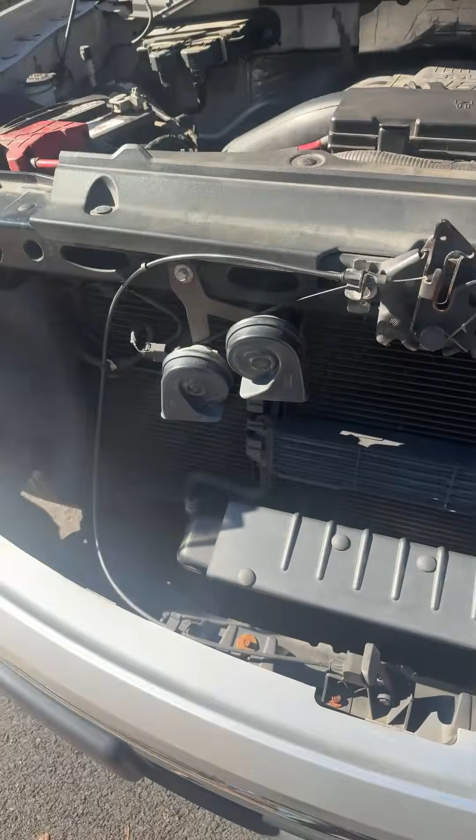So as soon as you put the key in, do you even got to start it for it to do it or no? You got to start it for it to kick on or no? Yeah, just stick it with the key in. Don't start it. So when you don't start it, it don't do nothing. All right, go ahead and start it up for a second. As soon as it starts it.

There you go. Dang. Now we in overdrive. Like that? It just started doing that out of nowhere. And you said after the car wash it happened? It just happened randomly. You can shut it off. And then so it shuts off, it kind of kicks down, does all that.

What's going on with this? We got to figure it out. We'll start with the diagnostics stuff. Get my computer on there. You got no engine light, right? All right, let's try it with the El Cheapo. Oh no. Yeah, I got you. That's crazy. Shouldn't be doing that. You got something going on here. I was thinking cylinder head temperature sensor, and maybe let me see. I'll get a flashlight.

The CHTS, I'll show you here on the Fords where it's at. Give me a second. Grab a flashlight. Let me show you. Show me what they fixed. Yeah, so you got a couple of them. That's probably not the right one. Over here, you said they did the sensor already.

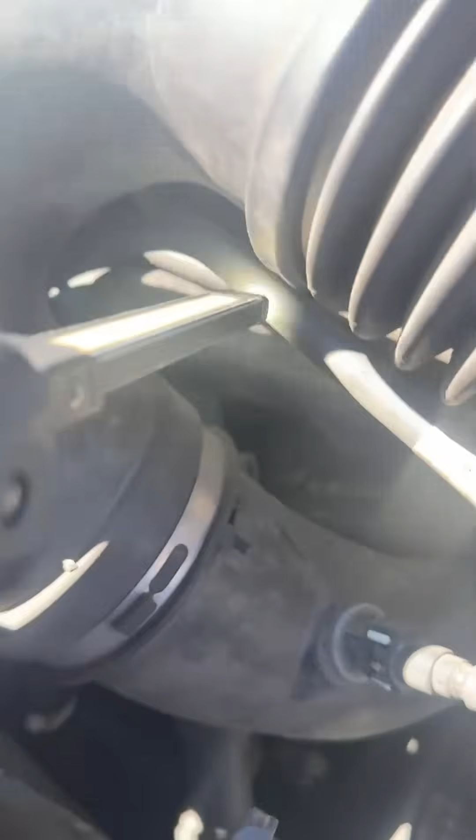All right, right down there, I think you got another temperature sensor. Yeah, I know there's a ground wire right there. I think it's CHTS, I believe. Let me just pop my cap off real quick. I can take a look, but I'm going to get my computer on. Ooh, that don't look good, bro. Let me see that real quick. Ooh, that don't look real good. I change it every 5,000 miles. I ain't saying that's the problem why it don't look good. That looks like it could be what I'm thinking it might be. Hopefully you ain't blowing no head gasket.

These 3.5s, how many miles on it? 190. Pull that dipstick out back there. Can you go and grab it for me? Don't rip it out of there. All right, let's see what that look like. Just hold it right down. Get it on a better setting. How high does it look? I think that looks okay. I can't really tell. Let me get some paper towel. We'll wipe and put it back in, give it that quick check, see if it's milky is all. There you go, wipe it real quick and put it back in.

It never overheated that you know of, right? No, I've been looking at it constantly. So just because the gauge ain't overheating don't mean you're not overheating though, you know? If the gauge ain't working, so why'd you get the other temperature sensor done? I don't know. It's just what the guy said. So maybe it wasn't working at some point in time. So anyway, see how it look now. Does it look level? Does it look high? It look really high, don't it? So when that usually happens, it means you may have coolant going to your oil. But then again, you didn't wipe it good.

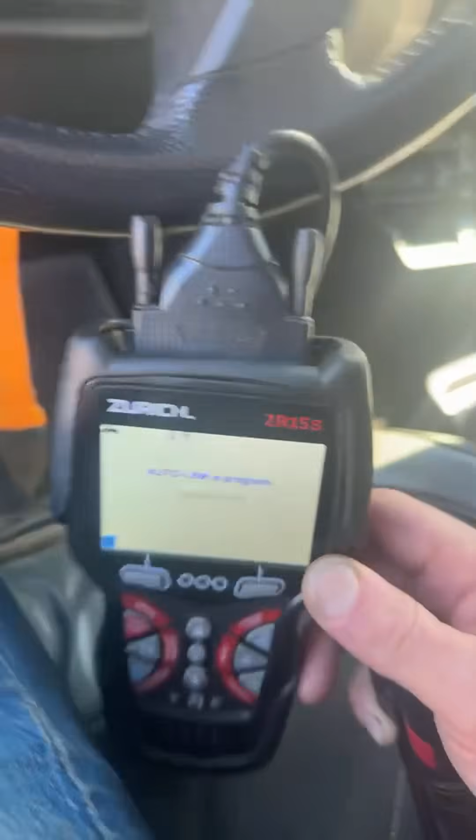All right. You got your key, man? Is it in here? Is it a push or not? Where's, oh, here it is. I don't even see your little key thing. Let's start it up. Just top back on the... there it is. Yeah. Make sure everything's back on tight. Just leave that cover off for now, so do I get everything plugged up? I'm gonna first do just an initial scan. We'll go from there. I'm not gonna start it. I just need to have it on. Let's see if you got any codes. We'll use the Zurich ZR15S first to see what we got. We'll go get the big boy out if we need to.

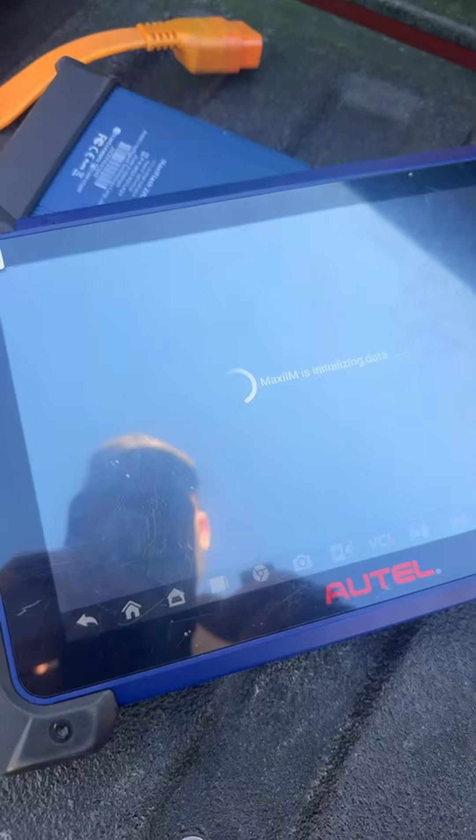Everything green on here. So, all right, the cheap one says you're good. Now we'll have to get the big money machine. Yeah, you got nothing on here, man. Shows you're perfect, which is crazy. So now we'll go bust out the big guns. They give me a password. Let me get out of here. Sorry, can't have y'all see my password like that. Give me a second. Get the Autel out. All right, we're ready to rock with the Autel now.

All right, let's see what we got. This will tell me something, I hope. If this won't tell me nothing, then we got a mess on our hands. Nah, this will 100% tell me something. Unless it's supposed to do that, which I don't think it is. The other one ain't real great of a scan tool. It just does the basics. There you go. I'm looking now for the plug and it's right in my face. I've worked on the cars too much, I'm starting to get burned out. All right, let me see here. First off, let's get out the Autel IM608 Pro. We're going to diagnose this properly. All right, we're gonna go to Diagnostics.

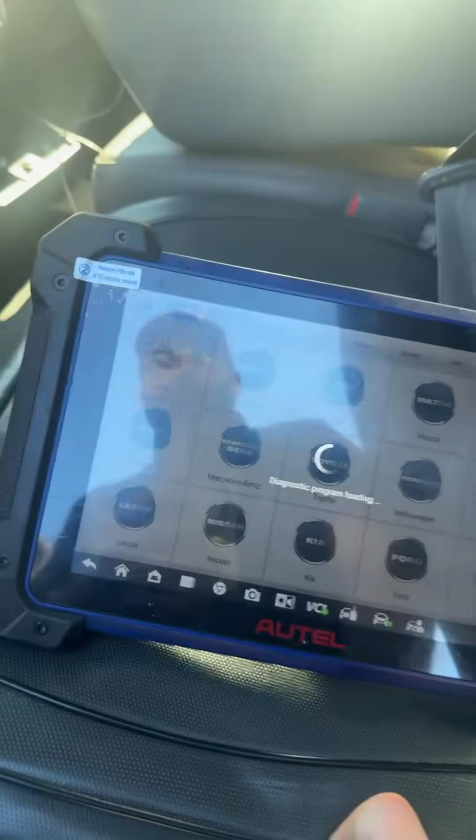Let's see. You still doing floors? They're doing mine sooner or later. My dad's so crazy, man. He's gonna get it done. He don't care. He's like, you don't want to do nothing until we sell it. He's like, I'm not selling my floors. Doing these floors, just mess them up. I don't know, he's just getting crazy, man. His thing was going great. You know how that goes.

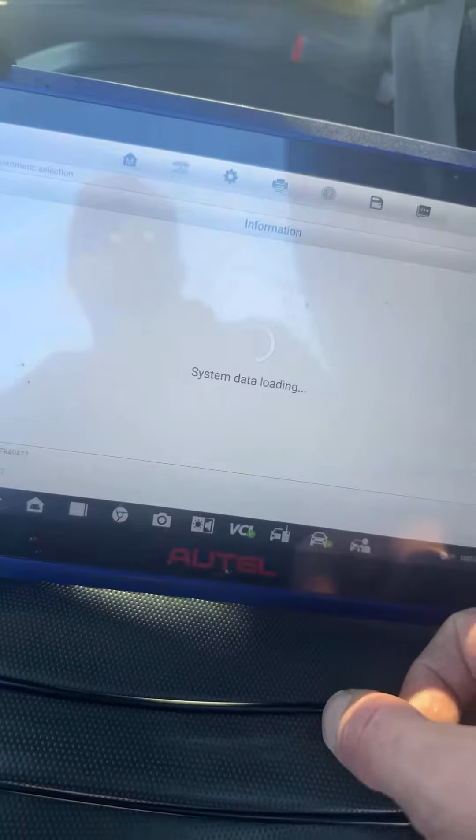All right, there we go. We got the information. Boom. I'm going to scan all your systems and we'll see what's going on.

I ain't seen you in, what, a year or something? In a while. Maybe more. I remember the last time I seen you, I looked at your car. We were dealing with something with the serpentine belt or pulley you were having a problem with. Something crazy going on. Been a minute. So you staying in the same house out there? Oh, okay. You gotta do it. I know how it is, man.

It's tough. All right, you got 2 so far on this computer. What the heck? You have a code for recirculation damper motor. I don't think that's related to this, do you think? Now, this is what I'm concerned about. Lost communication with front control display interface module. You just had that done, though, right? Your module, you said. You just replaced the front interface?

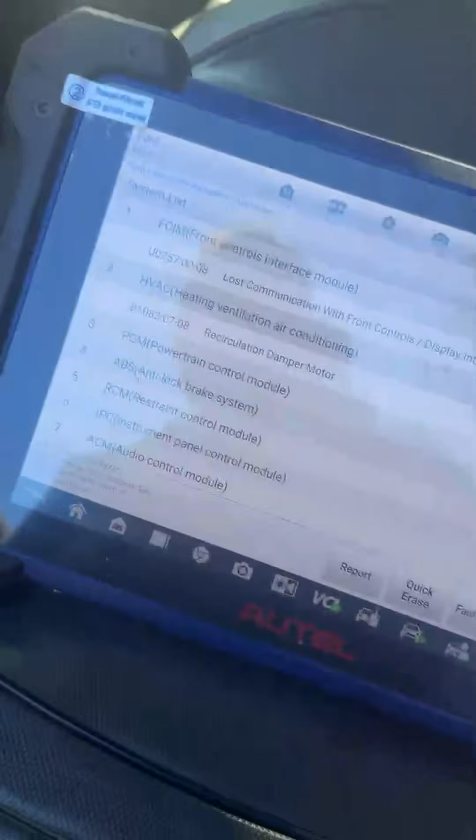Yeah, this guy right here, inside the car. Come here, I'll show you the codes I'm getting, bro. Come over here and check it out. So, lost communication with front. I never did take the battery off that when I replaced it. Yeah, so that's probably an old code, right? It could be. Yeah, because this thing is sensitive. I just unplugged it and then put that thing back in. You open this there? So could the recirculation damper do that? I don't know. That's a weird code. I'm gonna go plug it into my computer and we're gonna see.

This right here. Like I replaced this. Yeah, that's your front control. And you probably unplugged it when you did it, right? Unplugged it. Yeah, I took it out. Yeah, that's what it is. Put it back in, but I didn't unplug the battery or anything. I didn't know if it needed to be reset. I don't know. I just hooked it. I believe you. I believe took this out and hooked it back.

You got your phone on you? Take a picture of this real quick, because I'm about to erase these codes. It should be on. It's right there in front of you. Just pull it off the plug. You got it. You got your camera on here? I just need to get a picture. Yeah. Go ahead and take a picture of that for me right quick. I can't do it with my phone right now while I'm doing this. Take a picture of it.

Mainly, I need this code. Recirculation damper. I'm gonna enter the system though in a second. I'm gonna wipe him here in a minute, and I don't want to lose it. So that's your main DTC right there. That's what you need, that picture. Yeah, hang on to that guy. Yep. I don't know if it has nothing to do with it, but we gonna find out, right?

So let's see here. Would it pull any codes if you turn the car on? So let's say not current, not currently present. So I'm gonna start it and see now if I get a new code. I wonder if I can wipe it with my computer one time if that'll go away. Sometimes it will. So it kicks right on this, and that's so crazy. That's high speed too. So okay, let's scan it again real quick with the truck running. It should pick up on something. Same thing. We're not picking up on anything.

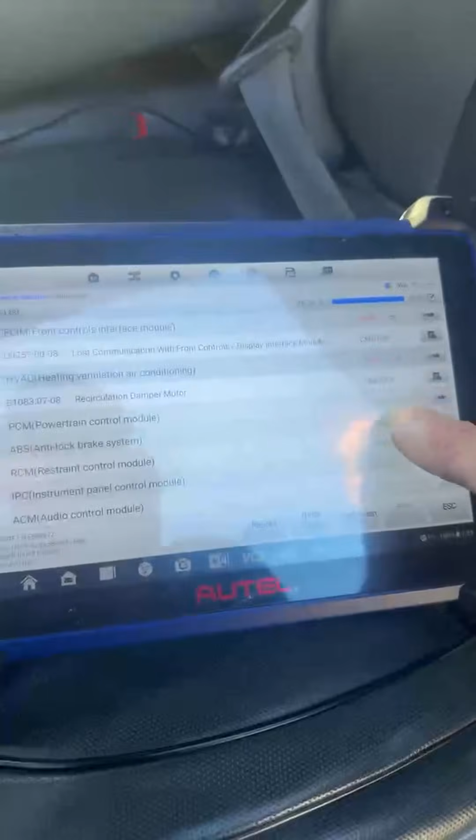Looking good. So let's enter the system and see what's going on with this guy. Does your AC not work right? Does it not recirculate? Yeah, it doesn't feel cold right now either. Yeah, that's what it is. Something going on. That's probably not unrelated. The AC works, but since it's been doing that, now it's not blowing the AC. From what I'm reading right here, man, I think it's like a relay, right? Check your relay box. The relay is getting stuck open or something. I bet you everything.

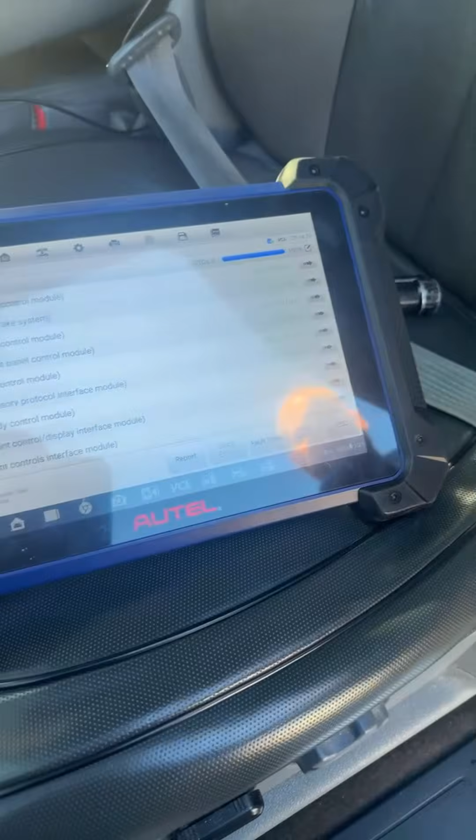And that's what would do something like this, because it's not going to really be a standout issue because it's not showing up on my computer. One of them, but I don't know if there's several of them or what. You have multiple relays on here, yeah, but there's no reason that should stay stuck on, right? No. So now that I've cleaned your computer of all your old codes, they're not coming back. So that's telling me it's probably a relay. So the best way to check the relays, let me show you real quick. I can do it on my computer, actually.

Let's enter powertrain control module system. Let's see if I can check your fans on my actual computer. I should be able to run a code test on here. Let me just check it out real quick. All your codes are clear. We're going to go here and do active test. Should be able to check your fan speeds, your different speeds, and we'll see what's happening in there.

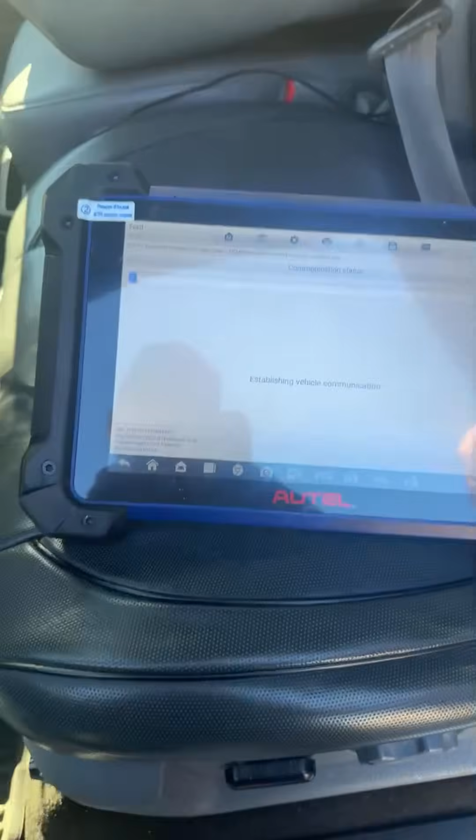Great part about having these new computers, man. They really help. I got to re-update this in 3 days. The crazy part is, I waited just on time. I'm gonna get like $300 off the update because I get the November Black Friday special.

I'm so glad I bought this around then. I didn't even think about the updates. They always give you like 20% off. Black Friday is great. I'm probably update 2 years on it. It's regular like $1,200. It's crazy. Whatever, it's not cheap.

All right, let's see here. Fan control, high speed. Let's just do fan control, low speed real quick. Let's check it. Okay, I don't need any live data right now. So I'm gonna monitor the fan speed. Watch this. We'll do on. Oh, what the heck? It's not supported. It must mean there definitely is a problem with it then.

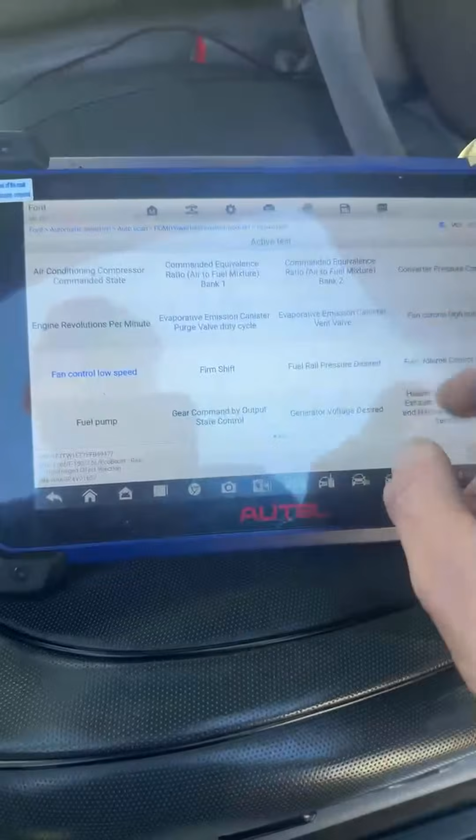Let me see. Let's try the high speed. All right, I just hit OK this time. Select all. See if I can do it. Probably gonna let me do it. Yeah, that's great. Let's read it real quick. You know what? Maybe because the fan ain't running, car ain't running. Let's see now if it works. Oh, wow, see that? Check it out. There we go.

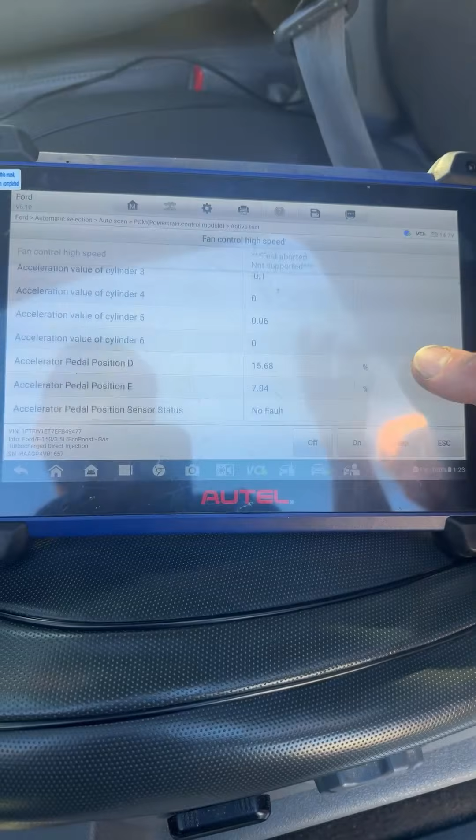Well, let me take it in. See, it's not letting me send it off. I was saying, even when I turn the controls off, it doesn't turn off. The controls are off now, but it just stays. Now, I guess it could have something to do with your AC too, because let me show you something. So your AC fans could be. Nah, it's too high, I believe.

We turn on these controls, nothing happens, nothing changes, right? Turn the AC on for 1 second, okay? Tell me if you get cold. Is that okay? Not freezing you yet? You put on the max AC if you need to. That's where you get the cold. Yeah, it's nothing to do with that, I don't think. So it should be freezing cold. It don't make no sense.

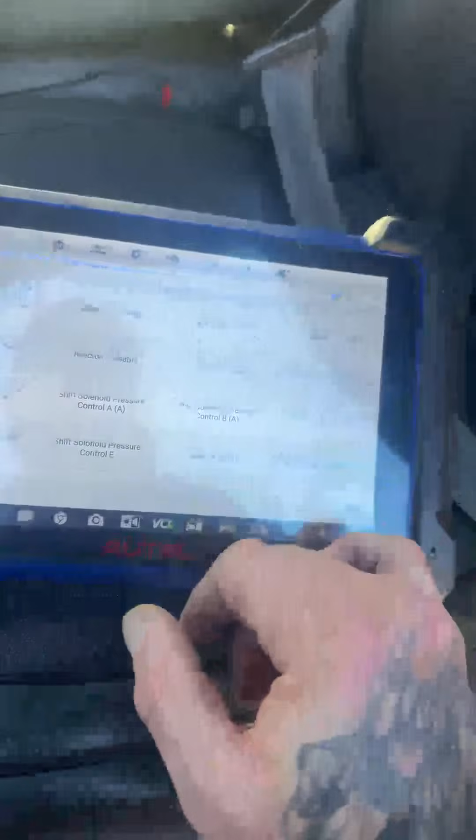Problem is probably with the relays. So I'm going to go up here and take a look at your relays first. It won't let me do the test anymore. I don't know if it's because they're stuck on, or it's knowing what's the problem. It should pick this up if it's a problem, but if it's a relay stuck, it's not going to pull up a code. So if I put my money on it, it's a relay.

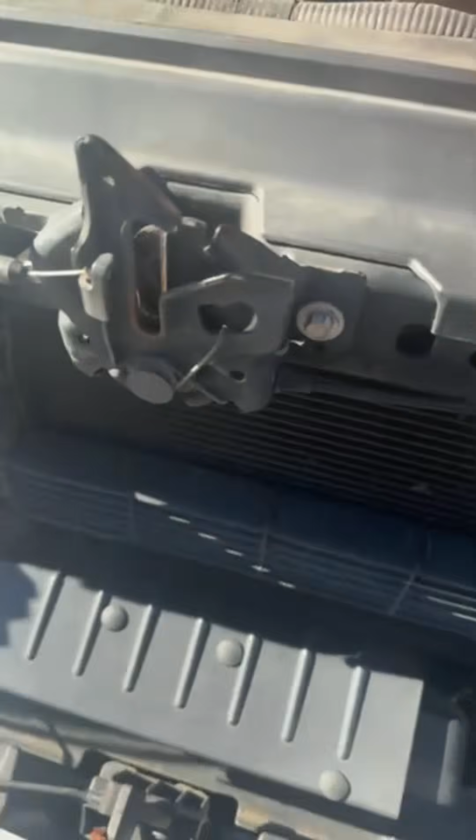So I'm going to come out here real quick. Where's your relay box on this guy? Up front? Right here. Yeah, these have a lot of problems with them. I don't like how that does it. You got one over there in the floorboard too. I turned it off, I think. Right now what I'm doing is smacking on these, not hitting hard enough to mess them up. Giving a little smack, see if anything's not doing right.

This one. You sure they put the right one in there? Ow, a piece of my fingernail came off. That hurt.

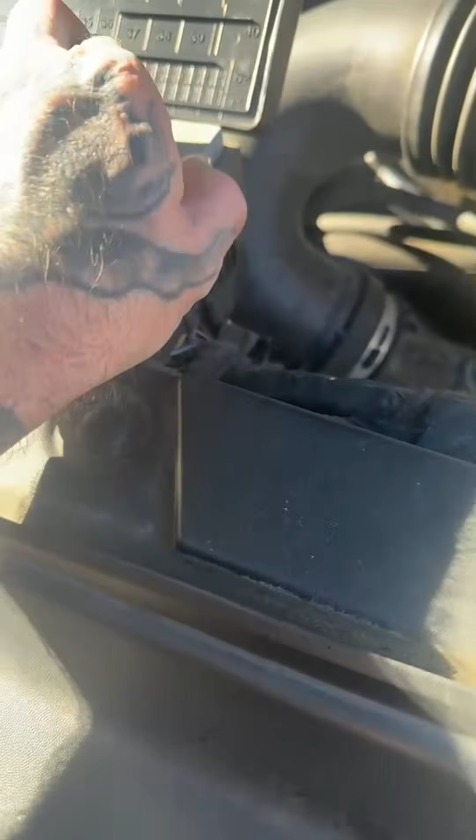They feel hot too. Yeah, there's a fan relay. Probably the wrong relay. That's burning up hot, man. It's unbelievably hot. Pull that one off real quick for me. Let me see that one first. I don't know if this is the old one or the new one. This is the old one, Ford Motor Company on it, right? Right, the new one. Put the new one back in.

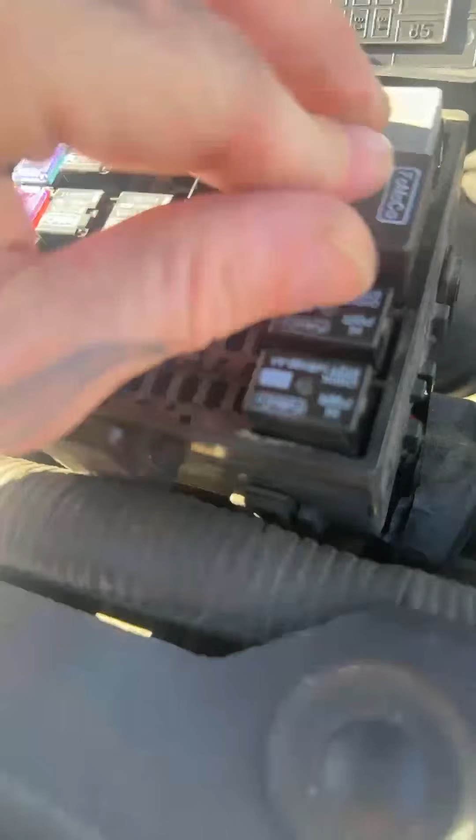Nothing wrong with a relay. I don't know why they fixed it for. Ain't nothing wrong with a relay. Relay's fine. You just seen the relay work fine, right? Yeah. So why did it turn off when it was out? Huh? Why did it turn off when it was out? Look at that. So the relay has clearly got a problem, maybe. Or the problem's under the box. We've got a lot of problem on the box. But what's happened is it could be getting stuck.

So now your fan ain't gonna be on at all. Yeah. But see, these relays, if you look at the top of this guy here, shows you how they run. Feel how hot that is too? Yeah. So it shows you how they run. So if it's stuck in an open position. Show you a way. Hold this real quick. Hold this, I'll show you something. Stick the bottom of my flashlight. Watch this. Okay, here. Turn the car real quick. You're not with the car going. That car's so hot.

Show you a quick, easy relay test. Watch this real quick. So you just take the magnet. Watch this. Hear it? Hear it clicking? Yeah. Now, is it getting hung? Maybe. Yeah, but it's definitely working. Yeah, man, I figured it. Look at this. Another way to check it with a probe. I can hear it clicking. I know the relay is good. That's not a bad relay. Same way with this one is probably fine.

But what's going on, maybe underneath where the relay is supposed to go ain't working, or something's definitely getting hung. I don't know. But regardless, it may be in the underhood fuse box as well. Let's see here. Feels kind of loose too. Like maybe it ain't making a real good connection. I don't know, but it's one of these issues here going on. So, well, I need to probably get my probe out. It's probably gonna be some kind of electrical. It's just got a lot of corrosion on it.

No, it looks good. So they put that in there thinking that was the issue. I don't know why they stuck in a relay. Yeah, they didn't know what they were doing. These guys don't know shit. Throwing stuff on there. Yeah, so if you look on the bottom, sometimes these guys are different. Hopefully they're the same. The dealership. Yeah, let's see here what we got.

A lot of times it'll be the cylinder head temperature sensor that goes bad. But my computer would pick that up, right? We definitely have a code for that. So what I'm thinking we got to do, I'm going to put the code and put this in my computer as an issue and look it up in, not ALLDATA, but Direct-Hit. Let me see real quick, and maybe check your relays.

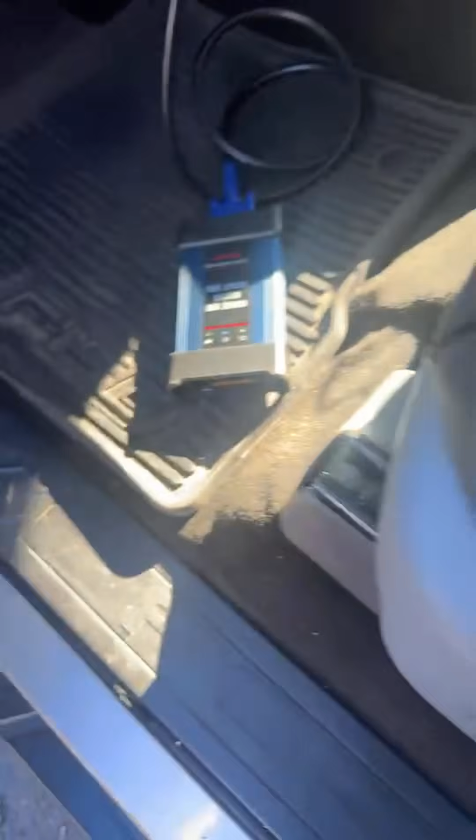On most cars, I can. I don't know if I can on here. Let me just try one thing. Let me enter your body control module. Oh, shit, you took the key out all the way. So yeah, I'm gonna put the symptoms in my computer, and we're gonna diagnose it like that. So that's why I brought my computer outside. Dang, I can't see. There we go. I'm gonna enter this system right quick. Do you need the relay in or out?

Well, I was gonna test it with my probe also. And I may probe it real quick as well. I want to see if it's picking up the right signals is all. I mean, you should be, like I said. I just want to make sure. The only thing is, it's not always easy to test the relay, to be honest with you. It can be a little challenging sometimes. See if I can check your,

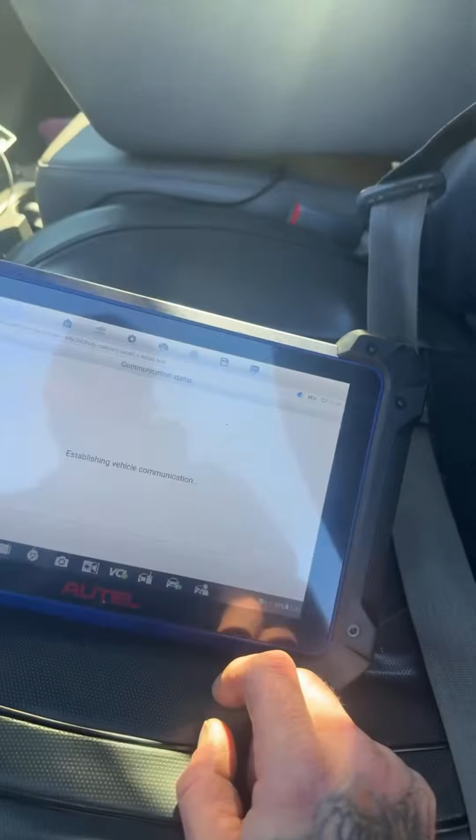let's see if I can test your door locks and just see if it'll let me test anything on your car. I don't need data for this. It should let me do it. There you go. You see that? That's the active. Escape. All right, let's go back here and see if I can't test your relays. Yeah, so I can test your fuel pump relay. Ready? Here we go. Here's your fuel pump relay. We'll check that guy.

Hear it clicking? Yeah, I heard a click. Okay, that means the fuel pump relay is good. Do me a favor, shove the Ford relay back in there for me. The relay to the Ford one, shove it back in the hole. Let me do it for you. I'm gonna put it back in. I'm gonna try to see if I can't test this relay to make sure it's getting the signal. That's all I want to do now. And we'll go back with the old one.

Who put that in? Somebody you know, or the shop did? Yeah, somebody I knew. Okay, yeah, well, I get why. It makes sense, but I don't think that's an issue. I always like to keep the original stuff if you can, you know what I'm saying?

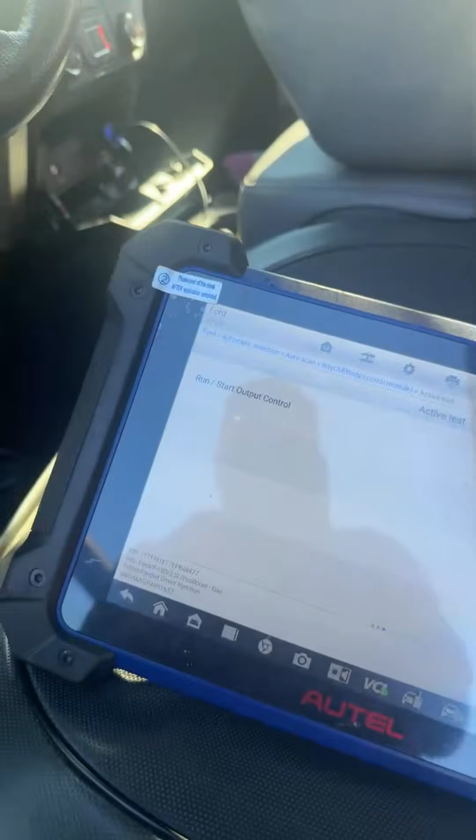You heard it click? Okay, it's probably because I just put it back in there. It could be because it has a constant output to it, which it shouldn't be clicking the second I put it in. So that's probably what's going on if you got a constant power. So, let me see here. I got to figure out a way to stop that. That's a problem. Which temperature sensor? Do you know exactly which one it is I just did? Because that will control the fans.

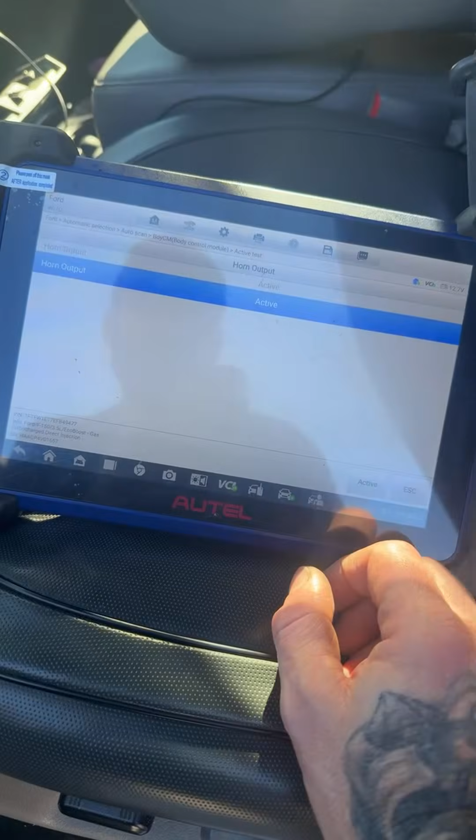Okay, I'm gonna go ahead and look it up on my computer, but I don't see one for your other relays. I can do horn output if I want. Watch this. I can do this too. See if your horn works. Right? Toot toot. There you go. Magic, no hands. All right, let's see. I can check your low beams, your lights. I just can't check that relay, which is annoying. But okay.

Run accessory control. No, no, I'm good. So, yep. Let me go plug in the computer. I got your VIN. Make sure you take a picture of your VIN and bring it up here with me real quick so I have it. I'm gonna need you to read it to me while I pop it into your computer. I'm gonna check, see what's going on here. I believe what's going on is the relay has constant power. These boxes go bad a lot underneath. Worked on a Raptor, had to replace it. I don't know exactly if this has a technical service bulletin on it for real, but it might.

Let me just see here. And what'll happen is some of these relays get stuck going, ow, my fingernail. If I do that again, I need to get a relay puller. That's my next investment I'm making, is a relay puller. Second time I broke my fingernail almost off. Darn it, that hurts. All right, let's try this again. Let's see.

Yeah, I think what it's doing is it's sending constant power. Show me the sensor that you did. I can hear it clicking occasionally. See if I can loosen it. Somewhere over there behind the tire or something. Okay, yeah. Let me go ahead. My computer will tell me, so I can stop screwing around with this stuff. I'm just going to leave this right here for now. Yeah, you can't have them running like that all the time. Kill your battery. It's just causing trouble.

So let me go ahead and put this in my computer. Take a picture of your VIN on the side door. I'm going to need it to put in my computer up here. I just can't get off. All right, we can put it in my laptop. I'm going to go to Direct Hit. We'll go look at this guy from here. More than one way to skin a cat. I'm gonna come up here, man. I'm gonna get on my computer right quick and look it up. We'll get on All Data. Not All Data, my bad. Direct Hit. Identifix. Get on Identifix.

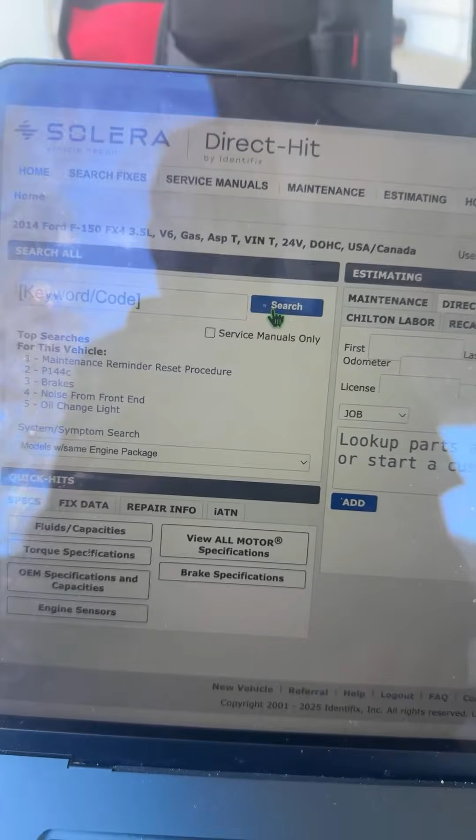So I can't let y'all hear all that VIN information, you know what I'm saying? All right, cool. It's all good. I put in the regular. No matter, all the same. Yeah, I'm going to search for all the modules anyway, so it ain't going to matter. If we're going to do this search here, we'll go here and we're going to do same engine package, plus minus 2 years.

Fans run. I just put in fans. Actually, let's check from there. I'll pull up all the hits. There we go. We got some fixes here. See. All right, let's check this out. Oh, here we go.

Okay. AC clutch engagement. Cooling fans are running at high speed after driving and warming up engine with AC on. Engine misfire, sometimes stalls. There may be misfire codes hidden. That's it. Not much on fans. Here we go, some more. Cooling fans are running high. Here we go. I think this is the one, man.

It's expansion valve. What? I don't know about that. But look here, it says your fans are running constantly. Engine coolant fans are running on high shortly after the engine started. Sounds familiar, doesn't it? There are no codes present. So right here, monitor the AC pressure sensor scan tool data to determine the pressure is indicating close to 400 psi. That makes sense with what his is doing. What's that code I gave you, Scott? 153 confirmed fixes. You see this, right? It's pretty crazy, right?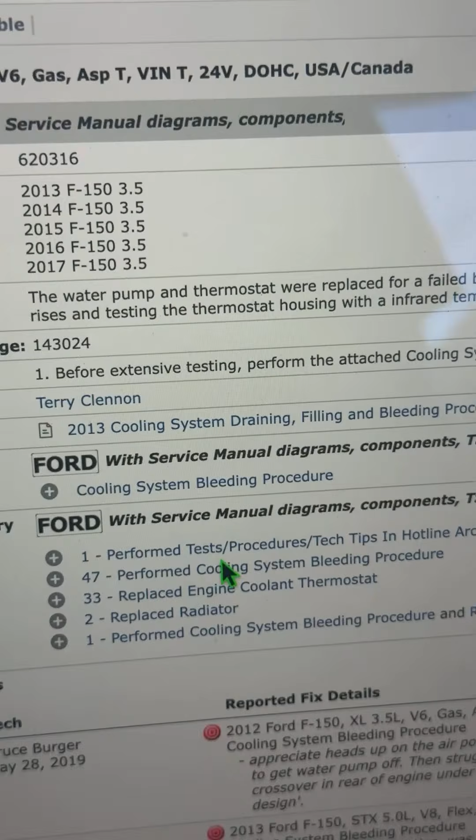Cylinder head gaskets. This is a picture I took. Okay, yeah, I need that. Let me put this in here, because look, there's a bunch of different ones. Oh, shoot, I clicked the wrong one. All these different things. So you can see right here. Check it out. You see that one? Let me see real quick. I'm going to type it in a second. Right there, look right here.

Water pump, thermostat replaced before performing the attached cooling. I keep bringing up this right here. This is one I think it could be. Contaminated expansion valve. Expansion valve is more than likely what's happening in your case, and that's probably why you don't have good AC. I don't know if that makes the fans run. Read that code to me real quick.

Which one? That one. B. B1083. There's like a colon symbol. That should be fine. 0708. Let's see where this goes. Is that the circulation damper motor? Is that the one you're talking about? Yeah, so it says right here, driver temperature blend door actuator. That's what I was saying earlier, I was thinking it might be. Now would that also give trouble with the fans? I'm thinking it could be related. Now, I don't necessarily think so, or maybe, let's see.

The dual automatic temperature control does not properly control the air temperature and airflow direction, clicking. Is it clicking noise behind the dash? When attempting to change the temperature, is it clicking? Under the passenger end of the dash. Okay, let me see. Driver, okay, anyway. So let me go back here. So with your fans, that's what's right here. This one looks most like yours. If you look here, this guy right here, 153.

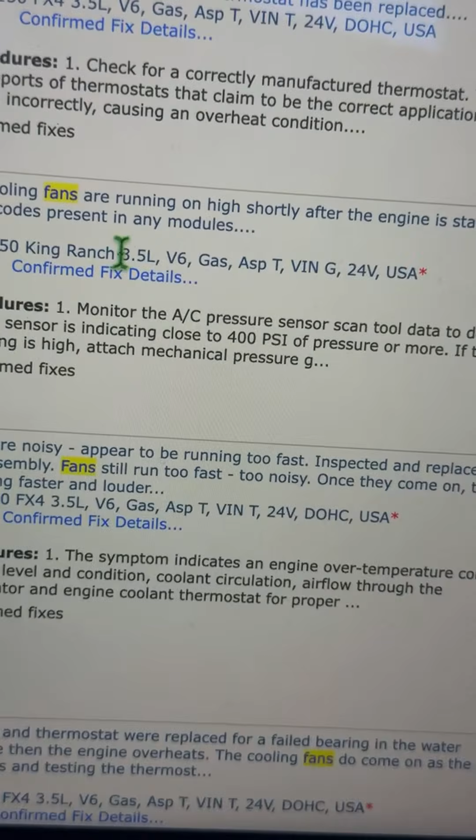Engine cooling fans are running on high shortly after the engine is started, there are no codes present in any modules. Confirmed fix details, right? It says something right here about all the air conditioning stuff. AC refrigerant high side pressure approximately 350 psi. Recovery and recharge. So drained and refilled air conditioning AC refrigerant.

What the heck? How did Siri come on? Don't do that. Okay. What the heck happened there?

Drained and refilled air conditioning. Recharge AC.

Thermal expansion valve is what I keep getting. The TXV. Very common on this car. I don't know why. That would also make your car not get cool. So I guess it would make your fans run. That's what they're saying here. So you look on here. Okay. Fans running high speed. AC pressure 350. Replace AC expansion valve and recharge.

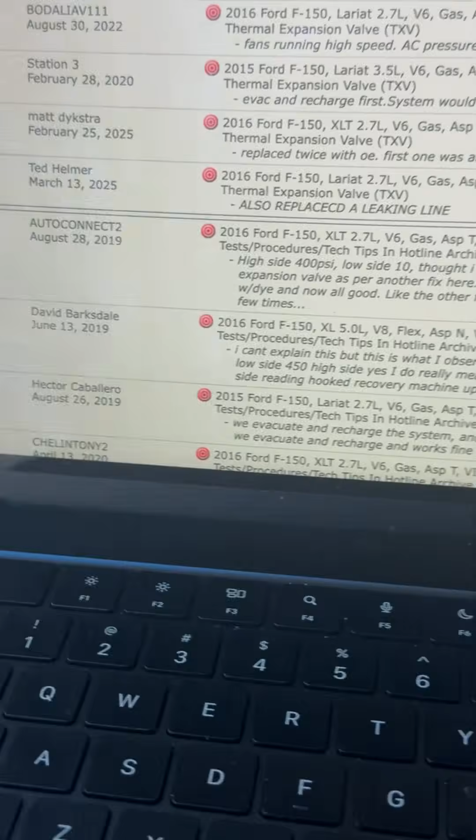That's crazy. You want to check your AC pressure? That's what this is related to. And it would make sense because you're just doing the same thing. And look at all these confirmed fixes. This is kind of how I know. Like, this many confirmed fixes, right? Pretty crazy. So, here, recharge. Okay, let's see with this. Your expansion valve is usually a pain to get to.

Let's see. Now, a lot of people just recharge the AC. So, air conditioner refrigerant recovered and recharged with the correct amount. The amount actually came in one, but the machine purged a large amount of air after recovery. Fans and AC worked properly after recharge. You see that? On all blower speeds. Unsure where air came from at this point.

Our scanner showed over 350 psi. AC sensor verified with gauge. Recovered the system. Air conditioning verified. I found AC pressure was very high. So somehow the AC pressure is the issue here. Fan worked normal and pressure was normal. So we need to work right now. We need to let your AC out.

And have you ever done that? Checked out your AC? No. I'm gonna check your pressure too. It could definitely be an issue. How easy is it to access your gauges? I have a gauge thing in here. We can check it right now. Easy to access. All right. You don't know what the little gauges are for? All right. Give me a sec. I'm gonna grab my pressure gauge right here, real quick. And we're gonna check that guy first. Get it done right.

Well, the good news is. That's what I was just about to ask you, how long you got. It shouldn't take too long to do this. I'm just going to do a quick check. Luckily, it's kind of cool this time of year. You don't really need AC anyway. Yeah, no, I don't need it. So honestly, I may just let it out of there. Let some out, see if that fixes it. All right, do me a favor. Probably take that back if you want to. Don't need that. That's fine.

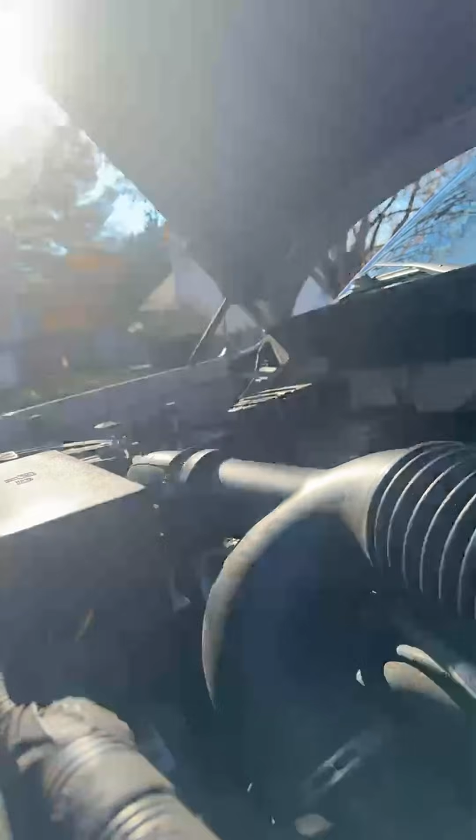And let's see where your hookups are out here. Make sure this is closed. That's good. Let's see what's on here. Make sure this is good right there. All right, cool. Film what I'm doing. Where's your gauge? Right here. Easy access. We'll leave this guy off right now. Hook these guys up. I want to see how high your high side pressure is and your low side pressure.

There you go. I think they're supposed to blow off. God damn, did you get that on camera? It's right there. Did you just see that, bro? I told you it felt tight. Yeah, you got a major problem. I need to let that out of your system. I think it's about to blow, bro. Right, I'm going to do this differently. Wow, let me see that. That's crazy. Hopefully y'all got to see that pressure that came out of there. Bro, that blew out of there.

Yeah, you got a major problem with your expansion valve. I got to let your pressure out of here. I'm going to let all your AC out. You cool with that, and we can fix the problem later. But that will probably fix the fan issue, I'm hoping, okay? Right now, that needs to get done. Now, I can try to recharge it, but that's not going to fix it. You got a major expansion valve problem. What happens is the pressure builds up on one side, on your high side. The thing almost blew off of there. I could feel the pressure relieving it.

I didn't expect it to shoot at me like that. Woo! Kind of scared me for a second. I was like, what the heck? It was like, pow! Right in my hand. That's why I was almost going to tell you to back up some. I felt like it was going to blow off. I didn't really think it was going to do that. Wow, that's crazy. All right, let me just get some of this air out of here.

I don't want to put one of my good gauges on there because I don't want to mess it up. All right, I'm just going to get one of my cheaper gauges. Give me 1 second, man. This should fix your fans, I'm hoping. Yeah, I think I figured out the issue. Give me 1 sec. Wow, that's crazy. I never in my life seen nothing like that one. That thing blew off of him like a rocket.

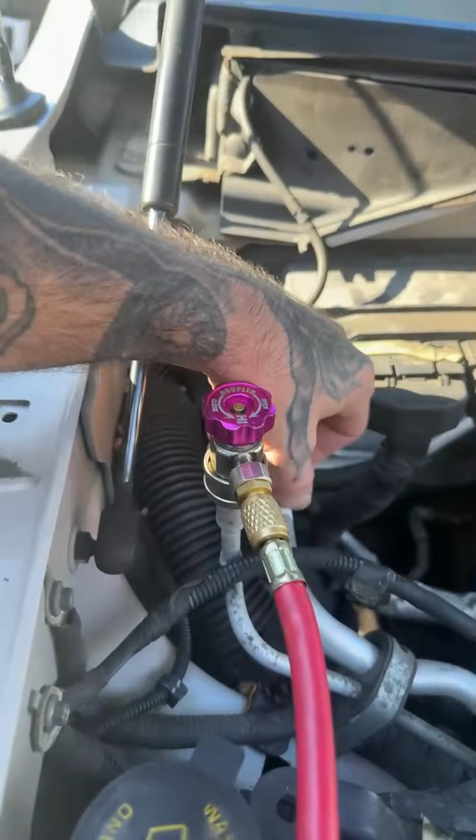Okay, one on at least. We'll take our time. We'll get one on at a time. Wish me luck, man. Let's see if the other one shoots off like the other one. I'm getting a little nervous here, though. This is a 2014 F-150 XLT. Both gauges are now on here. Get it snug on there. That one didn't go on, actually. Now it's on. Right now, we got the coupler closed. All right. Let's see here what the daggone readings are.

All right, do me a favor, Scott. Kind of nervous to do this, I ain't gonna lie to you. Start the car. Well, actually, don't start the car yet. That's not a good idea. Give me 1 second. I want to test it with the car off first. So I'm gonna get this on here first. Open the couplers up. Oh man, get ready for this one. It may be not good. I'm gonna take my time with this guy. Get out this side first. I'm gonna blow off my face.

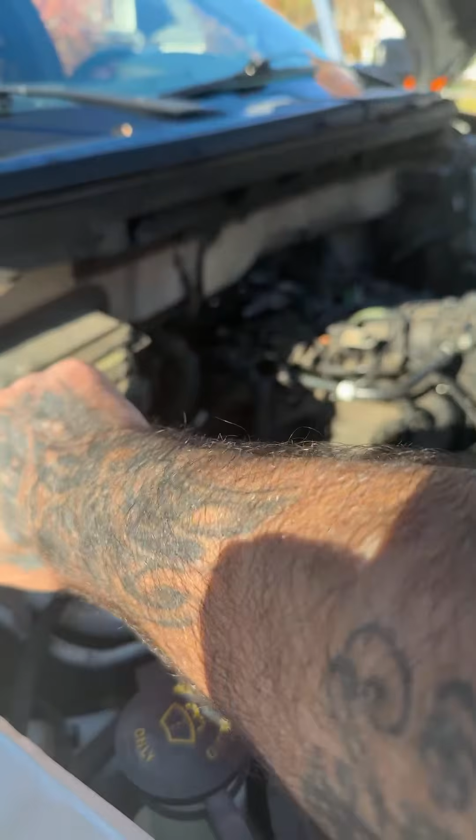All right, so it's got heavy duty pressure on this one side over here. I'm kind of nervous a little bit, ain't gonna lie. That's the high pressure coming out already. That's crazy. Don't do this at home, like I said. Ain't supposed to be coming out like that. Can't believe all that pressure's in your high side like that, bro. That's incredible. Start the truck up for me real quick. Yeah, go ahead. Open both these up.

Yeah, nothing on the low side. Turn your AC on for me. Fans off, right? Okay, cool. That's all I need to see. Now turn the AC on. That's all it was. Overcharged. You were overcharged. Who charged your car last? You can still have an expansion valve issue, for real. What I did was I alleviated the pressure.

That's normal AC run, yes. So, it's fixed. What it was is the fans. Yeah, I'm not supposed to do that. See, the fans, you were overcharged. If your expansion valve's gone bad, it's filling up high pressure on this side, making these fans kick on nonstop. So I just let out a little bit. You ain't supposed to do that, but like I said, I was trying to hook it up. It's too much pressure, so a little bit got out, big deal, wasn't much. Everything's closed up now, so it can't keep coming out. And I didn't even really mess his AC up, honestly.

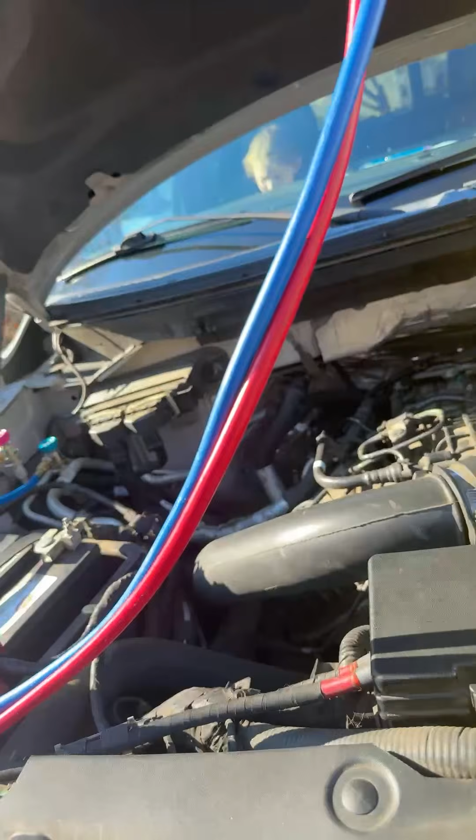Now I'm going to check your AC. I'm going to make sure it's working properly. So just leave it on for me. Leave everything running. Go ahead and shut the truck back off for one second, though. I'm going to close these back up for a second. Close them back up. What's that? Yeah, shut it off. Leave the key forward. So shut off, leave the key forward.

So make sure these are shut all the way too. Give me one second here. Make sure these are all shut here. All right, these are both closed. These are both closed here. Okay, great. They're all closed. So I'm gonna go get a can and put it up to here. I'm gonna check your pressure. The problem is I can't do it with the car. No one's touched that thing, so I don't know.

Yeah, you got a bad expansion valve. So what happens is, what I was trying to explain earlier, I use Direct Hit. That's Direct Hit Auto. So I just gotta pick that part up. Well, it's a little harder than that. I do them. Yeah, I can do it, no issues. But I'm gonna make sure you need it first. It could just be you have a blockage, or you could be overcharged. You know what an expansion valve is, right? Thermal expansion valve. Sometimes they're a real pain to get to.

So what I'm gonna do is let this guy out of here. I don't know nothing. At least you're honest. I don't know anything.

No, I want to be over here. I can't quite get to that. Hang on one second. Push on that damn thing. Hold it real quick for me. I'm gonna try to let a little air out of there real quick. Well, I hope the gauge is up. It may already be out. How's my gauge? Never mind. You can hang on. I'll be right back. I gotta go grab one can of AC for you.

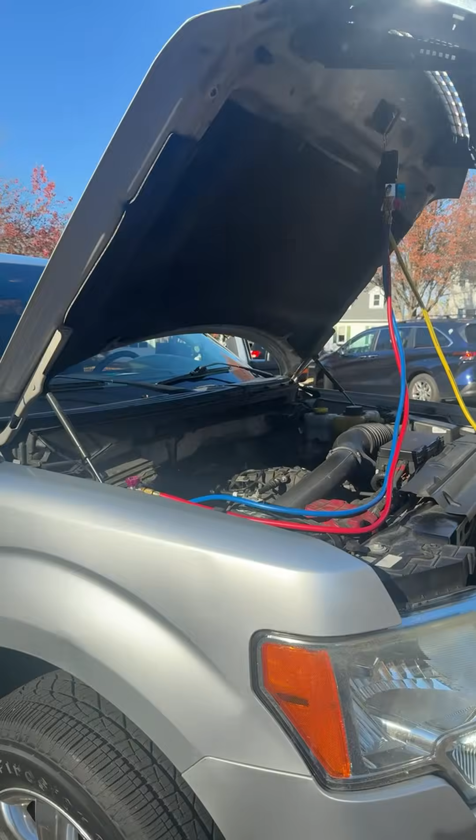What does it take, R134? I don't know. It should be the same as your truck, right? Same truck. I mean, I figured, wouldn't they be the same? I have no idea.

Anything they can do to make things more difficult, they like to do it on cars these days. Yeah. I already know, I deal with it with tools. They switch everything up where something doesn't fit. You gotta buy the whole new thing.

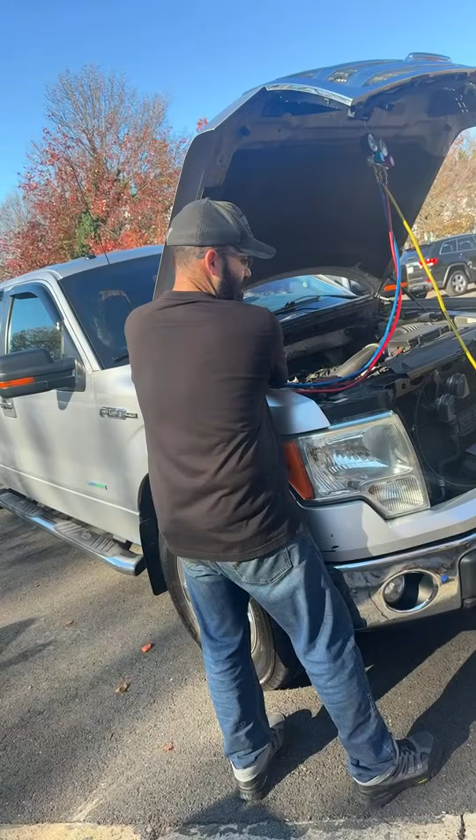Yeah, I can't get this damn thing on here. It won't work, probably. Let's see now if I can open them. Probably not. I don't know why my gauges are not really working perfect. Feel high pressure now. All right, bring that guy over here. Open up. All right, we got both of them up.

All right, start the car for me. I'm just getting this guy chilling. It's not even really doing nothing. Start the car and put your AC on. That's what I need you to do next. Okay, get all the gauges open. Make sure they're open real quick. They're open all the way. Okay. Turn the AC on and let it run. All right, look at that. There you go. That gauge right there.

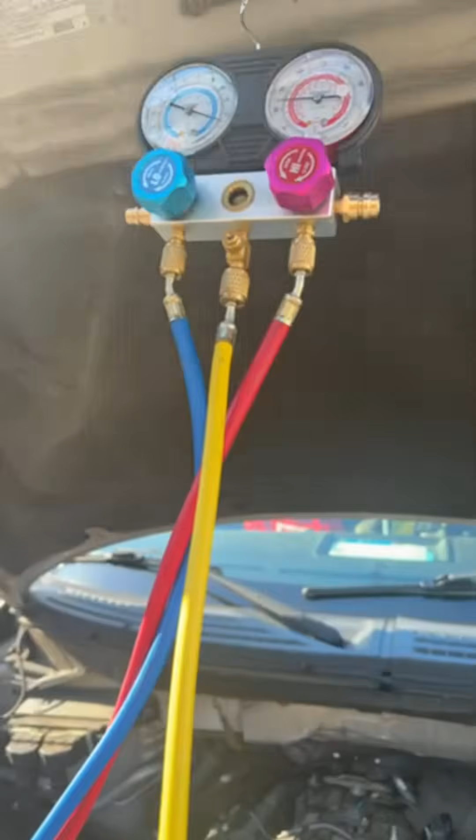So look at this. That's pretty crazy. This is his low side. Now, they should start to equal out, hopefully soon. I'm going to let it idle for a second. You got the AC on. Okay, and what I want you to do with the AC is pull it from the outside for me. Not recirculation. Just outside, high AC, but not max. All right.

But the lines feel cool. It could have been you had a blockage in there. You may need to put some oil in. Tell you what. All right, shut your AC off for me real quick.

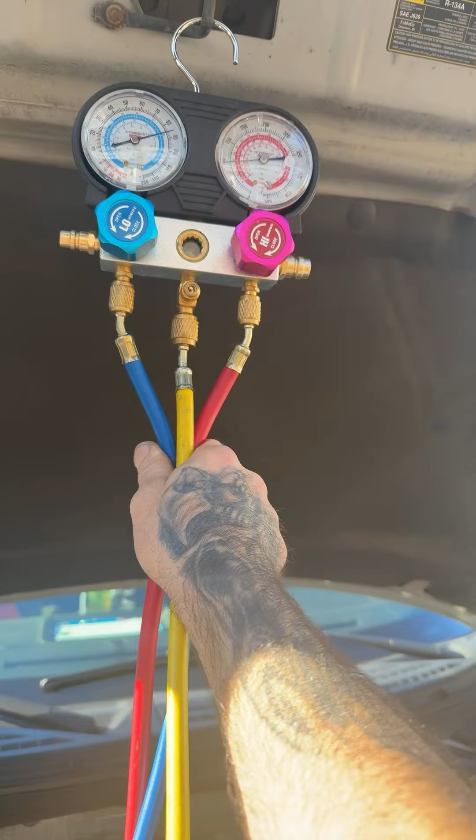So your low side pressure, I mean, it's off. Yeah. You know how to read an AC gauge, right? You never did HVAC? No. Right. Me neither. I'm just kidding. I'm just saying if it's going to mess up.

I mean, if you look at this stuff, this doesn't really look this bad this second. But again, I don't know how much is in here or anything. I'll be honest, right now, I don't know what the readout's supposed to say on this gauge specifically. I'm just checking it to see if the gauge is fluctuating properly. All right, go shut it off for me for 1 second. I want to see it move. I'm just trying to right now look for movement.

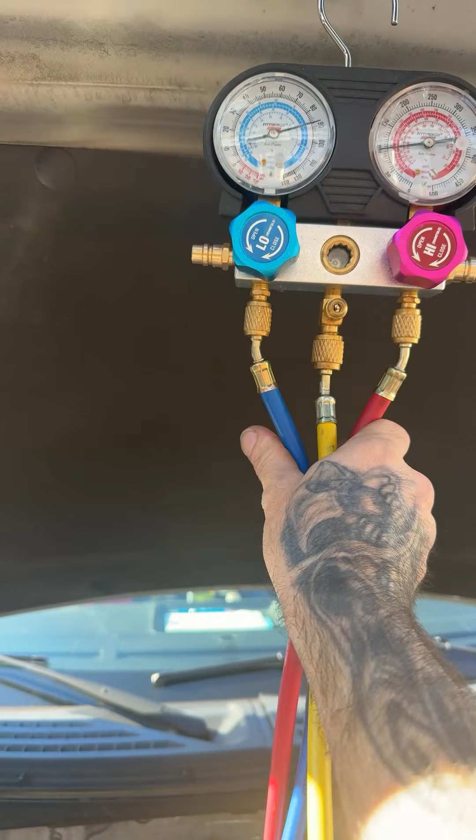I don't know on this specific vehicle, sorry, the exact readout. I do not know. But I do know when this gets shut off, this should move. I don't even have the gauge hooked up 100% correct right now. I'm just trying to see if anything's, yeah. So I don't even think my gauges are working, honestly. The gauge is going down on the low side? It should, but it should go a lot quicker than this. I don't have everything hooked up right. So I tell you it's probably a blockage. It should fluctuate a lot quicker than this. I need to let everything out probably.

I think what I would do if it was my vehicle first is I would discharge the system, which I can't do here, so I can't really test it either, because it's not legal to do that right now. So I'm not just going to squirt it out everywhere into the air. It's a big no-no. But yeah, that is not good. So you need to be able to evacuate it properly, and then I would definitely put oil into the system. See if the oil fixes this issue, which it very well may, and then go from there.

I mean, I'm good to still drive it, right? Yeah, I mean, I basically fixed your issue. So I'm going to have you basically monitor it, okay? And if you want to, do me a favor, take a picture of this gauge real quick and send me a picture of that gauge. I'm going to go get you the reading right now, what it should be. I just don't know exactly what it should be on this particular car.

I got a short week this week, so anytime. Yeah, so what you can do for me, I just can't get on my phone. It's the only thing that sucks about doing this and also trying to get on your phone. So send me that picture real quick to my phone. I'm going to do one thing, and I'll tell you what the reading should be. In 1 second, I'll come back on and tell you guys. You got it sent to me? All right, cool. I can't get it right now. You know what?

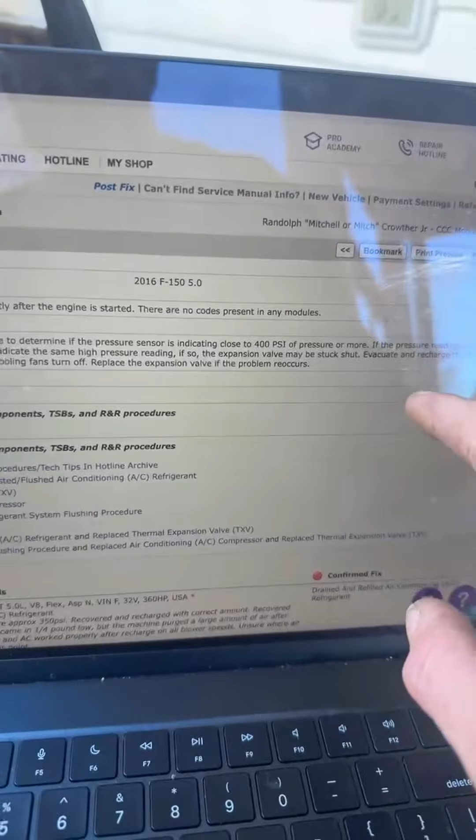So this is Direct Hit by Identifix, which is what I use. Can y'all see that right there? Direct Hit. I use it all the time. It's awesome. You can tell this pretty much nailed the issue for me. Good to have. That's the vehicle. This is what the problem is, okay? So right here, pressure's reading high. Mine was.

So the pressure's canceled. Pressure sensor is indicating close to 400 PSI. That's crazy. Then yeah, so I can actually put my tool on. It'll tell me too. So mechanical pressure gauges to see if they also indicate the same high pressure reading. If so, expansion valve may be stuck shut, which probably is going on here in your case. Evacuate and recharge the AC system to see if any readings return to normal and the cooling fans turn off.

So that's exactly what I just did essentially, is evacuated just a little bit and I got the high side off. So if your expansion valve is stuck shut, this will come back on right away and you'll know. So if the fans get stuck again, then yeah, you should call me and say, hey, it is an expansion valve, and we'll get the fix done. Okay. No sense in fixing it until I know.

And actually, that's why I said there's no sense in recharging it right now until we know either. Because if I do all that and waste all this money on a recharge, you're just wasting money, especially if you got a blown expansion valve, because I got to let it back out again. You know, so really, that's the best way here to fix it. Like I did. That's why I just let a little bit out. I wouldn't let much out. And your fans kicked off instantly.

Guess what? Just found the issue. Now, would I have been able to figure this out without this? Probably not. But I did know it was related to your AC by that one code. But the one code didn't tell me anything. I just put 2 and 2 together. That's how I figured it out. But yeah, it makes sense.

We're going to go right here, recharge it, information only. Right here, so drain and refill, recharge. Let's see, replace thermal expansion valve. That shows me how to do everything. If I need to do any of it, it shows me right here. We're actually just going to see, do recharge information right here. Did you get the reading for me, what it should be? Did you look that up? You see, monitor the AC pressure. I don't know. All right, let me see. Yeah, it says right here.

So with the AC on, engine 15, okay, it said the low. So the blue side should be between 25 and 45 PSI. High side should be 150 and 250. So that makes perfect sense. So anyway, like I thought. So yeah, so his cool side is through the roof, which is unreal. Yep, and that's why I blew the thing off in my hand essentially on the high side. One of the sides are stuck shut.

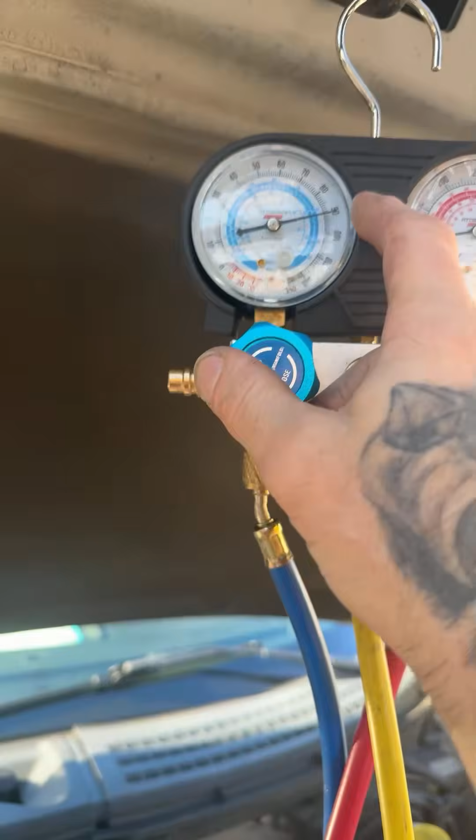Isn't that the PSI? The parentheses, yeah. So this is reading. Yeah, you're exactly right. It's way too high. That's what I was thinking. So these are my cheap gauges. I don't use these a lot, and I don't even know if they're working. So this is way too high. So yeah, your expansion valve's stuck. This is why you're through the roof over here.

So what I can try to do is we can let a little bit out of here. See, I know something. The red should be 150 to 250. Yeah, I let some out. So what's happened is this, all right? So I'm gonna let some out. Yeah, so it's stuck, 40, and I know it's stuck. You know how I know it's stuck?

Let me hold this for a minute. Take his cap over here. Hold this for a minute. I know it's stuck because it's not moving. When you turn the car off, it should fluctuate. Nothing moves at all. That's another issue. I know something's wrong, right? It closes up, so I don't blow this thing 30 feet across the cul-de-sac.

Let me get this top off here. I don't have it on that tight. I need to let some pressure out of here. Give me 2 seconds. I don't want this thing to shoot through midair. Let a little bit out of here. Just gotta press it, Jimmy. There we go. Leave some pressure first. All right, here we go. Perfect. So I'm just using that to hold the pressure in. That's all. Watch this right here.

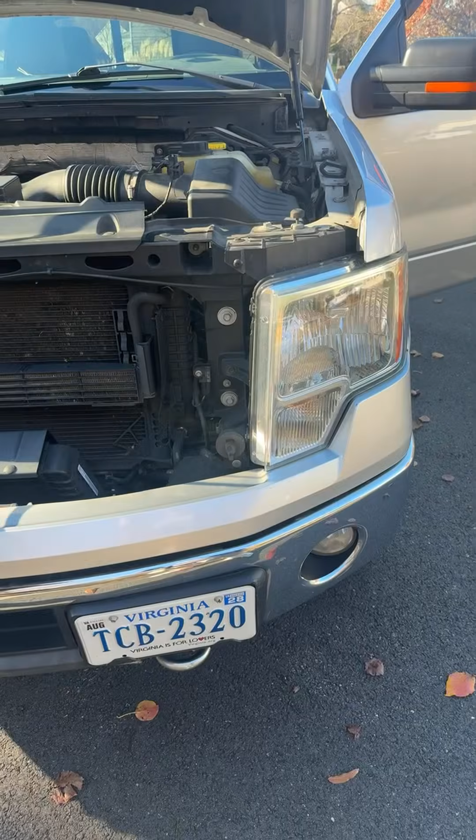Now we can let a little bit out the low side. You can see here. A little bit out here. See that real quick? Yeah. Now, while it was running, you see right here, I've got your low side open. Check it out. You got no refrigerant coming out your car. That don't make no sense. That means your whole high side is full of pressure.

Now watch this. If I open it right here, we're very careful when I do this. Definitely make sure I got it open right. That's open here. There we go. That's the low side. Look at that. You can tell it's got a blockage in there. It's just barely letting air out of here. Now, if I do the high side, I bet you that thing flies out of there, right?

I'm not gonna let it all out. I just need to check it. So I'm gonna close this side. Now I open the high side, right here like this. Let's see if the high side's gonna fly out of here like whoosh, probably, like the thing was trying to shoot earlier. Remember that? There's your high side. Check it out. See that gauge? That's actually reading about right. Where should that be at? 150 to 250.

Do you want any air on? Turn it on. AC on, right? You want the AC on? Yep, AC on. With circulating air? Yep. So I'm gonna check both the high side and low side now. Yeah, so the high side, way too much pressure. The fan came on from the AC, so it's the regular fan kicking on. They should do that, right? All the time.

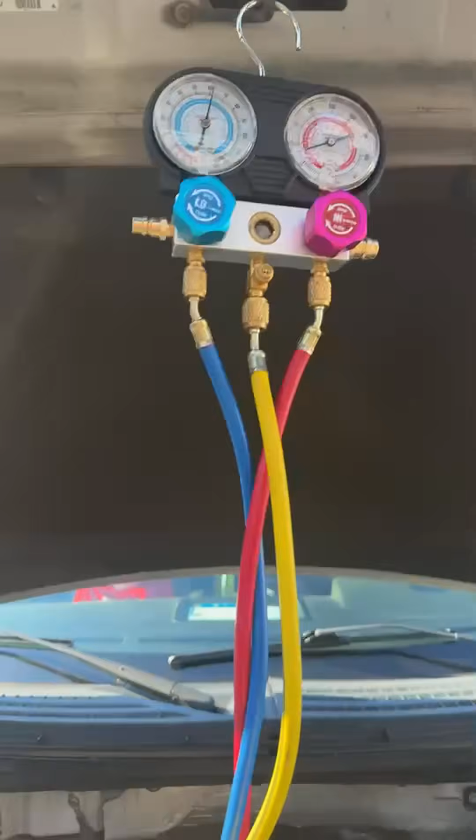So now, if we read the gauges now, that's about right, because that's the low fan, not the high fan that was on before. So I'm gonna open these up again. And the pressure's down about 20 on that one, so it's down to 60. It was supposed to be between 25 and 45. Problem is I can't stop my gauge like I want to. Hold up 1 second. I'm gonna open both back up again now that I let them out.

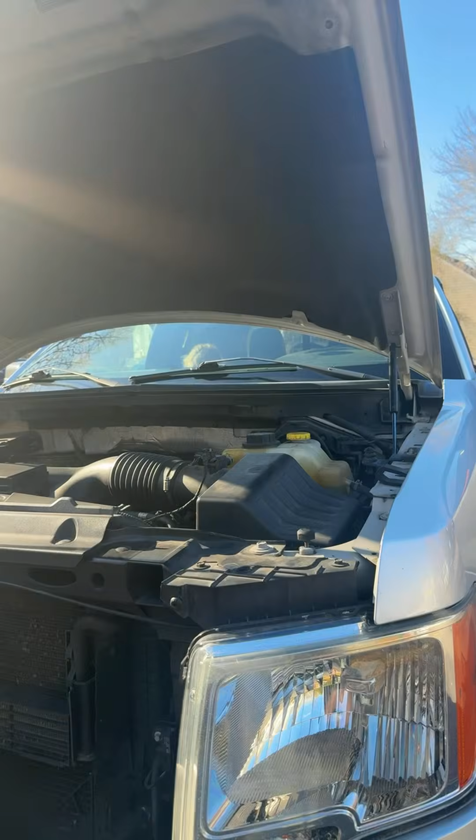I think what's going on is each time I let them out, it's like it fixes itself for a minute, then it builds back up pressure, right? Open. Let's see now what it reads with both open. See, it was closed a second ago, right? Makes sense.

I don't know. It's about what the reading's supposed to be, right? What PSI do you have for that? So the low side is supposed to be 25 to 45. Okay, that's right. So the high side is supposed to be 150 to 250. Yeah, so I don't know. Like I said, I don't. Clearly a blockage. Probably your expansion valve. But then again, my gauges are kind of trash. So I don't know. I don't use these gauges a lot. But

With the engine running, if these gauges are right, he has a blockage. But I know he's got a blockage anyway. So I was basically doing this to let some air out and run a test. So regardless of what's going on, he's got a blockage. Problem is the thermal expansion valve is getting stuck, more than likely. But if you let out some of the pressure, go see if your AC is even working right now. It should be working okay.

Like I said, I don't know the specifics on this exact model car. I just kind of... Not cold. Not cold at all. Would it be cold right now? Yeah, it should be super cold. All right. So I'm going to attempt to put a little recharge in here for him. It can't hurt. Let me go take care of that. Give me 1 second. I'll be right back.

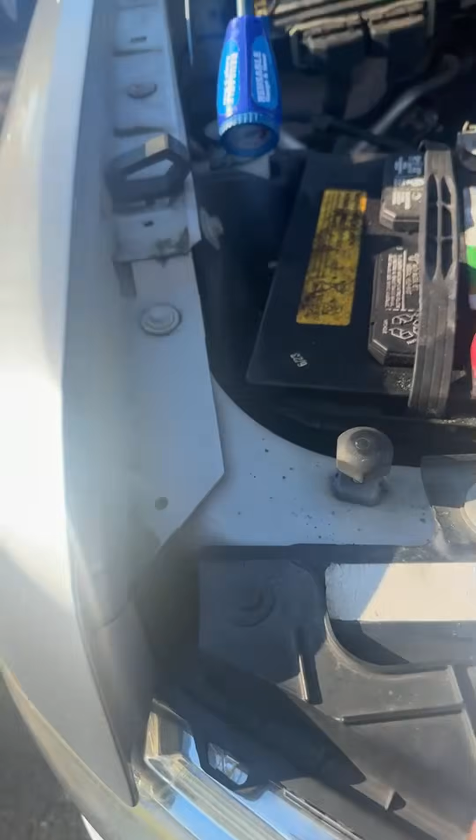Now that that's all hooked up, you got your car running with the AC on, right? Yep. All right, cool. We're gonna start with one of these cans. You shake it up real good. Then we'll start filling it. So the oil pulls through here and goes right down into the vehicle. I'm just gonna do it the easy way so you guys at home can see how to do it.

I don't really have any gauges. I'm only gonna read this side, and the rest I'll do with my scan tool if I need to. Either way, it should work fine for now. Hopefully you'll get some AC back. I'm not gonna get crazy. I have to do this since I let it off. You wanna hold it for me? I'm just doing this to see if the expansion valve will clear. A lot of times you might have had debris in there, and you just do this and it'll work fine. You can try to flush the system sometimes too.

Anyway, just put it right on here like that. Hopefully, I'll go like this first, and then stick it on second.

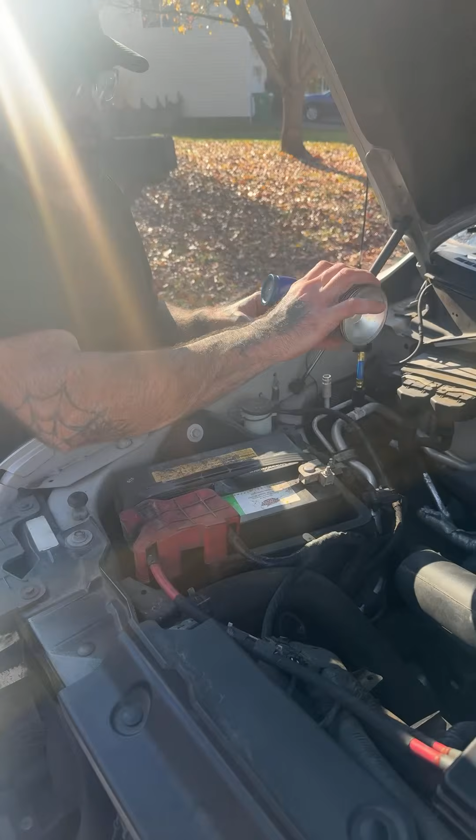It's letting someone in. Kind of scary right over there, honestly. Nearly getting hit. That's crazy.

There we go. Throw your AC on. There we go. We're going to get a little refrigerant in it. Come on now. There's a little bit of gas. That's right. Cycle the oil.

Now we know the AC is on, right? What do you want to do? Yeah. There. Huh? Yeah, don't do that. That's expensive.

That guy is still really low. It's having trouble taking that refrigerant. It doesn't want to go through there. So more than likely he's got a low side clog. I'm not going to continue to do this. I'm going to shoot that sucker up like a baby. Let me see if I can get it to take it. More likely his front expansion valve is blocked.

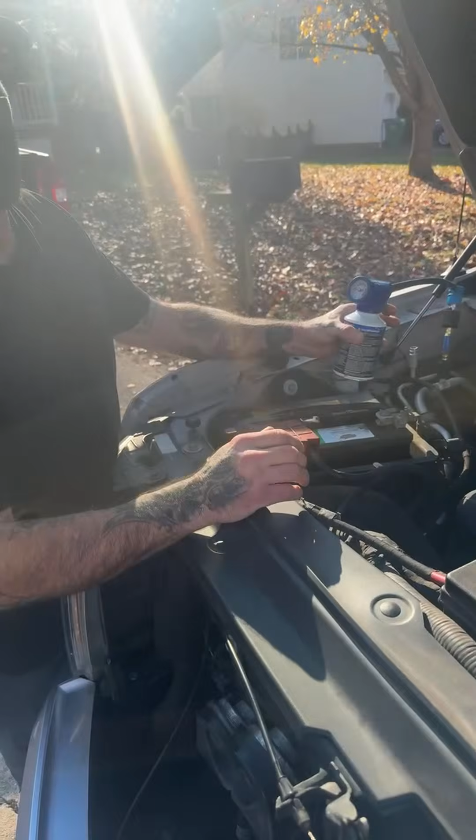This time, like I said, sometimes it's a little hard to go through because of the oil trying to push through there. So I'm going to give it a second so I can pull through. So I'm taking my time. Having trouble.

There we go. He took the oil out of that. Oh yeah. He probably was dry of oil. It sucked that oil out quick. That's the easy way to fix your oil. The main thing about these, don't lose your O-ring. The O-ring would fall out. I had about like 50 of these because the O-ring always shoots out.

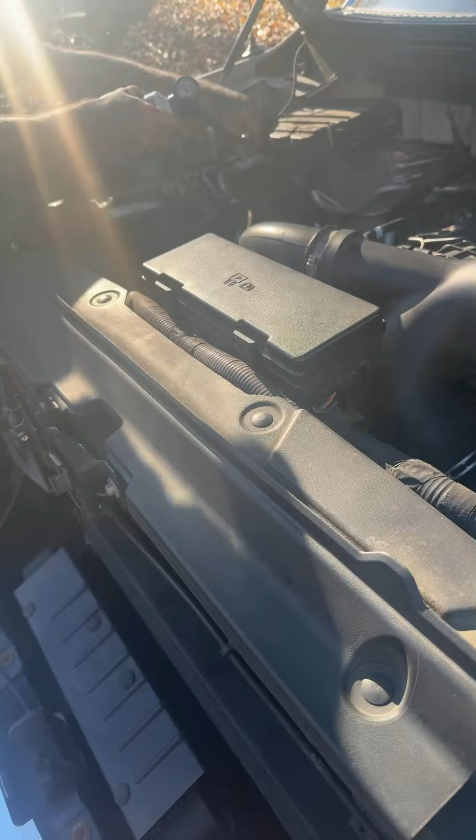Anyway, now we'll see if we can fix it. Hopefully that oil frees the system. Oh, so that'll be great. So yeah, we'll just do this. Let's do it. Right there, and that damn low port doesn't get on. We don't like my gauges today. There we go. There it goes on there. Good now. See that coming through? The gauge is actually starting to work. Should be getting cooler.

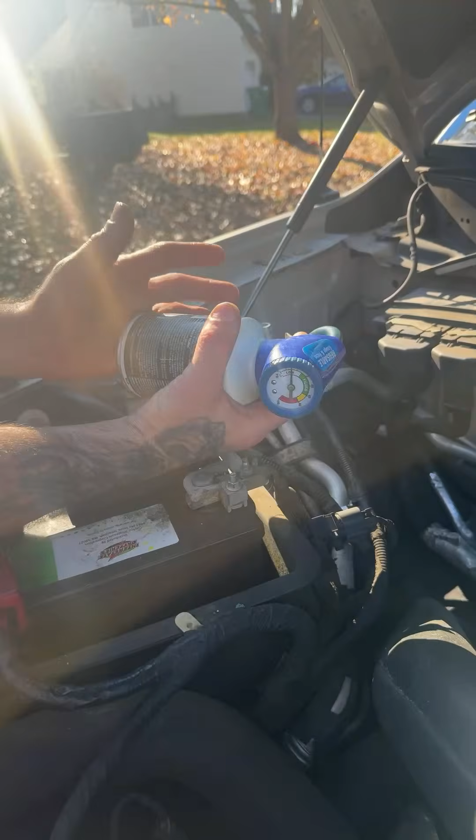Hopefully this fixes everything. And that may just be low on oil, because that'll definitely make the expansion valve be stuck. Of course, at a shop, they'll make you buy an expansion valve. You don't need it, because they don't know what's going on. They're like, oh, well, I'm just telling them we did the expansion valve. How are you going to know? You know what I mean? They don't have a clue.

That's what people don't understand. Right there's your expansion valve. Right here, thermal expansion valve. And I can tell if it's working, because both lines will be full. And your lines are kind of full. You want to do me a favor and shake up another one of them cans right there? So basically, just doing this the old school way. Charging it up. And it's definitely charging. Right there is the thermal expansion valve. That's what you're going to want to fix. That's probably got a blockage in it.

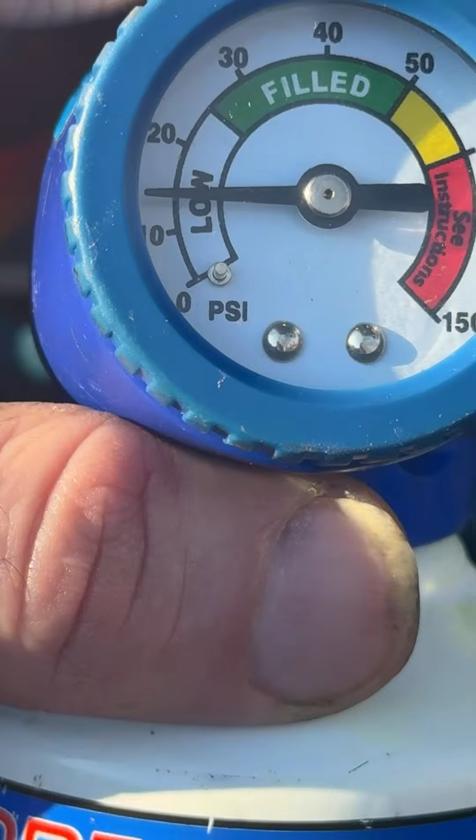Yeah, you pointed out something good there. See how that's rising up real quick? That's because your clutch probably wasn't on for that second. Your clutch doesn't run all the time. So right now your clutch is off, right? When your clutch kicks off and you're still low, it's going to shoot up. That's how you know, if you're ever at home and you want to know if you're low on refrigerant or your clutch has gone bad, if you plug it up, it'll be way up here.

So now when the clutch kicks off momentarily, you'll see. It'll fill up quickly. It'll go up. See like it is now? And you'll hear the clutch engage down there in a minute. You hear it? That's the clutch engaging. All right, here we go. We'll let that set. I'm gonna give it some gas. The reason I keep giving this car gas like this is I want it to push the oil through.

You can feel the AC working a little bit. A little bit. All right, you got it nice and cool. It's starting to get cool already. It really is. So how much does it say on your truck?

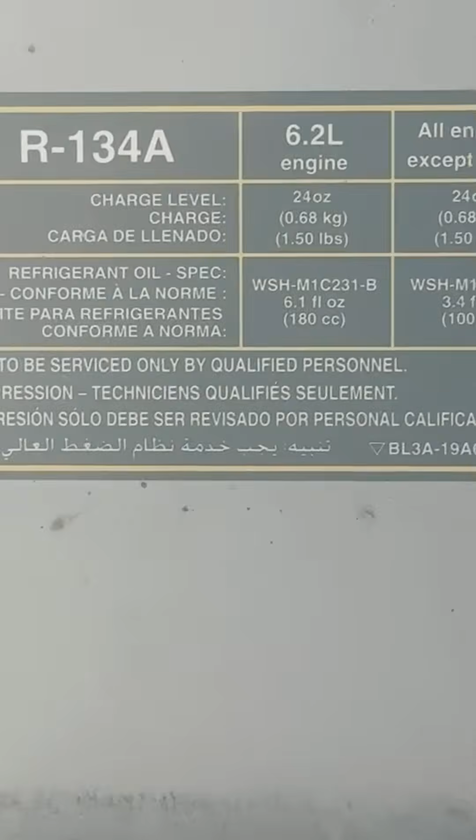Oh, it does have lubricant on there as well. R-134a for it. 24 ounces, that's just 2 cans. 24 ounces is all it takes on this car. Getting cool already, ain't it? So we don't need to really worry about overcharging this guy. We'll go ahead and put 2 cans in and we'll do the real test. We know if it comes back, he's got an expansion valve issue. We know for a fact that's the case.

Oh, yeah. Of course. Definitely can. Make sure it's clean. I'm sorry.

I'm gonna put this other can in. You got that can? Yeah, let me do it.

I'll be right back. Give me 1 second. Let the daughter go to the bathroom real quick. That's all. I gotta make sure it's situated for her. The young lady in there. Very, very young. I gotta make sure. I'm a little crazy in here. I think it's good. I just got to clean it. You know how that goes. Oh, it's fine. I just gotta make sure. All set. Looks good. All right, you can go ahead. Make sure it was clean. Let me see. You can soap too. It's right here. You want to come in here when you get done? Wash your hands. You can go right here. Okay. Whatever's easier for you. All right. Let me finish this off. Sorry about it. Nah, that's cool. I just want to make sure it was fine. I just needed to make sure it was situated for her. You know what

I'm saying? All right. So this one shook up, right? Yeah. Cool. Here we go. Hold that for me real quick. For one more can. Should be getting kind of cool in there, ain't it? Yeah. Starting to work. Go ahead. Two cans. So, you know, two cans of Freon. Got to get the Freon. I can see it already. What's that anyway? Let's go make sure it's working.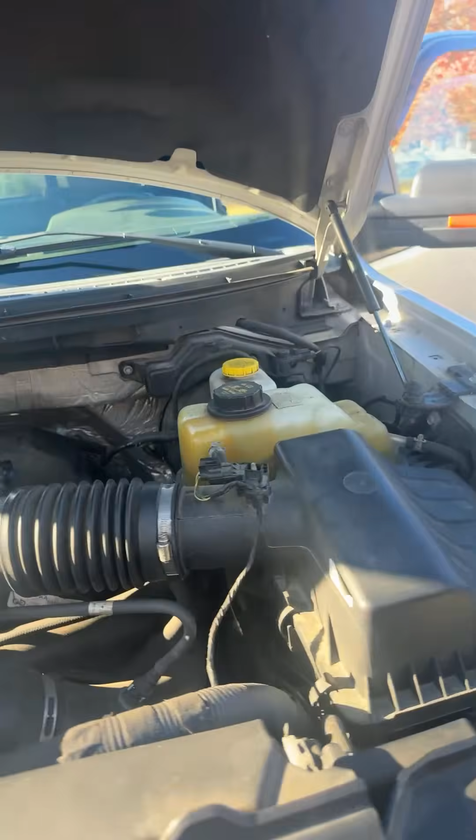That baby is kind of low on oil, man. I've never seen fans do that. Yeah. And give it a little gas real quick, make sure. It is colder. It's definitely colder. Yeah, it's probably good. It's cold right now.

My daughter's in the bathroom, just so you know. Yeah, she had to use the bathroom. What you did? Oh, I was just telling her my daughter was in the bathroom. His daughter's in the bathroom. I was just letting her know. It doesn't matter. I didn't want her to freak out when she saw someone pop out of there. She ain't gonna do that. Well, yeah, she's. I'll tell you something. So, yeah, she's. Yeah, just joking. But my girlfriend was go get you. It might be real cold in here.

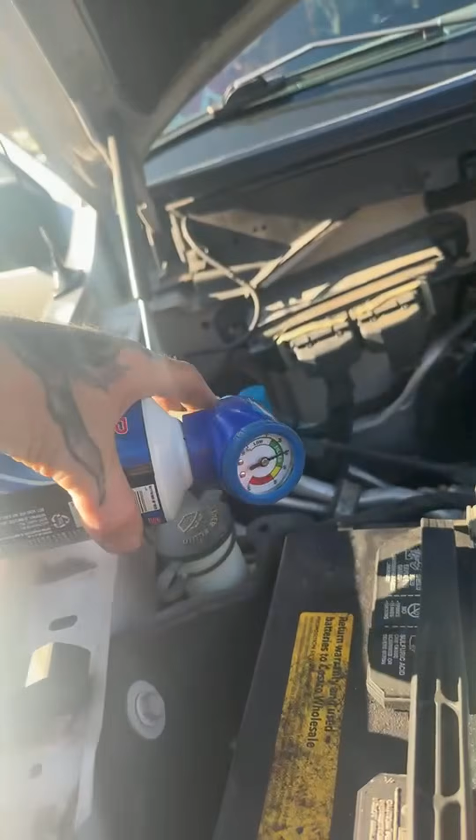It's getting there, probably. All right, so we're almost to the point where we can stop for now. So we should have this nice and cool, as you can see. I need to get all the cans in, but it's kind of forced. It's not letting me get 2 cans all the way in there for sure. Feels like it could still be, like I said, a blockage in the expansion valve. But for now, this is fine. I just want to make sure we have enough to do a proper test on the system is all. So what I do know is this. We have enough in there now to test it.

This is where I think the blockage is at right here. Try to just give that a little push real quick to test it if I can, get it on there, just push it down. I'm going to stick it on here. Just try to open the valve is all. I can't get it in. Usually you can just shove something down the hole. This should work. I don't want to hit it very hard, just enough to see if I can let some of this out of here right here. Push down gently, see how fast it squirts out of there. Be careful when you do this.

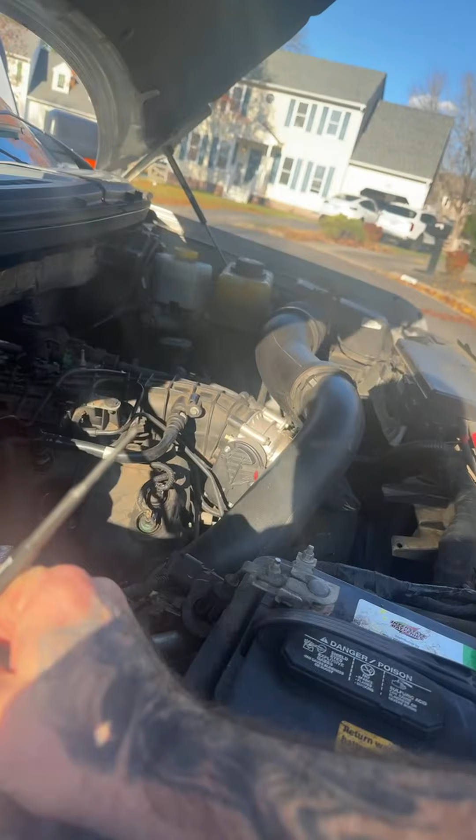It's really pressure built right there. It really is. Can't push down the valve. It's so crazy. You know what? I'm gonna get something better to do that with. I don't want it to shoot me right in the face. You know what I'm saying? It's kind of crazy. Here, we'll use this guy right here. That should work perfectly. This is a pen I use for holding on.

Wow, you can tell that was pretty decent pressure. Oh, that's that for sure. So that's supposed to have higher pressure, so it's not the end of the world, but you can definitely see the pressure came out of there. Either way, watch out for that guy. Anyways, it might take care of it, brother. You're charged up pretty good now. It should be getting pretty cold. Just let it run for a second here. That was pretty cool, pretty crazy.

So that's the first time I've seen something like this. I ain't gonna lie to you. I've never seen something not charged make the fans run like that for no reason. That's kind of crazy, right? I know. So cold, the daughter can't get in there, so it must be working okay.

All right, I'm going to put the 2 caps back on here. Have them monitor everything at this point in time. Just needs to be monitored is all. Yeah, I think now just keep monitoring these. All right, give us some gas a few times for me. Check down here. Nice and cool. There you go. Let everything cycle.

All right, do me a favor, shut the truck off. See if the fans kick off again. There you go. Just let it set for a second. I'll make sure I don't hear any leaks. Sounds good though. No fans running. So that's how it's supposed to be. So hopefully this takes care of the problem. More than likely it does. If that's the case, great. All I needed was to let it out. But I have a feeling I'll be back.

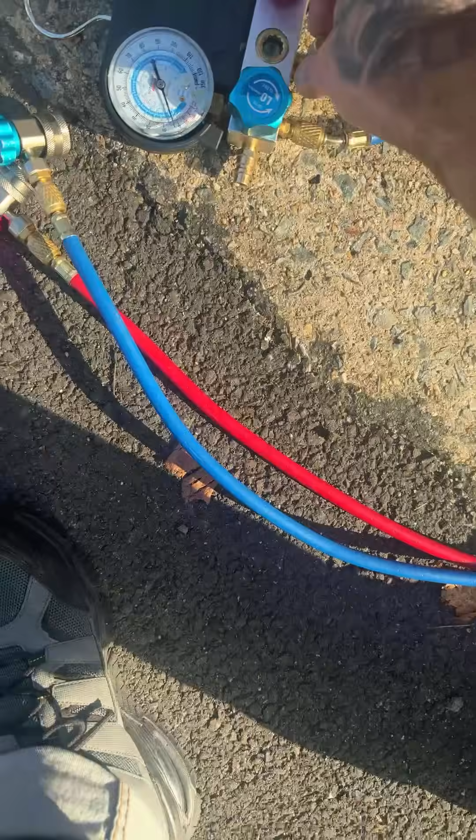Yeah. Anyway, that's cool. So I think that's gonna take care of it. Definitely, probably needed some oil, honestly. It wasn't too crazy. That's kind of a weird deal. I've never seen something like that myself. Now the fans are gonna come on, right? That's actually normal right now. If you have fans come on like that, it's normal, because they're supposed to come on a cycle. Put these aside real quick. I'm gonna finish reading the scan tool. We should be good to go with that. Hopefully. We'll see in a minute, though.

Oh no. Dropped your gas on the ground. Dropped it on the ground. My bad. Anyways, my bad. Right on the ground you went.

So, go ahead and finish up these tests here. I think he's all straight. So, if you have a Ford truck, a 3.5, and your fans are stuck on, you may just need to first let the coolant out. Really easy. I showed you how to do it my way. Start the truck, let it out, recharge it. That's the first step to the fix, okay? Always do that first. Then you want to go to doing the harder stuff. If this doesn't work, move down to check out your expansion valve.

Now, I didn't want to get out the gauges. He doesn't have time, neither do I. So this isn't a 100% certified spec video. But this is enough information that you should be able to do it at home. Sometimes it's actually better, because a lot of people need this DIY information. You see all this technical stuff, you don't know what's going on. I don't blame you, because half the time I don't know. I'm just kidding. But it can get confusing.

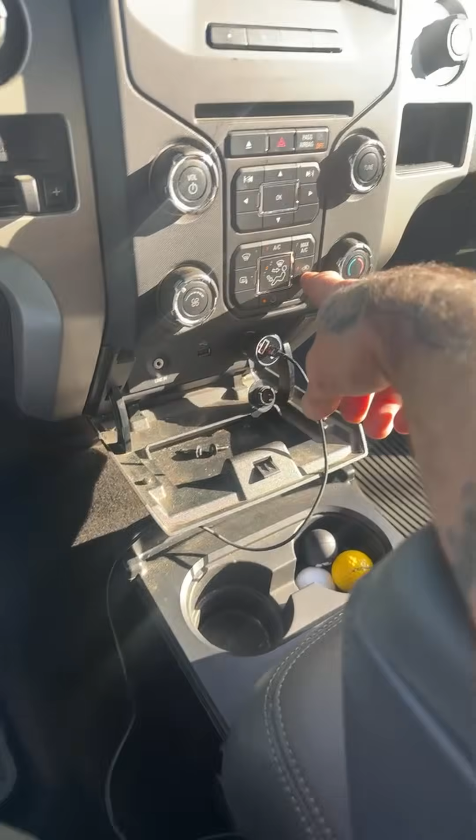It's just telling me the recirculation damper motor. That could be totally unrelated. I think he's got two issues going on. I think the motor could be going bad and getting hung, or maybe it thinks the motor's getting hung because there's another issue with the actual, what's it called? So recirculation, this guy right here. So when you hit this one here, blend door, kind of what it is. So we recirculate from inside and outside. You see, turn it on? See if I can hear it.

Sometimes what happens is the little pieces come off, the little legs and teeth come off over time. Put it on real quick. I'm gonna turn it all the way up and make sure how good the AC actually feels, which it feels really, really cool actually. So it feels pretty good. Should be nice. Give it gas for a minute though.

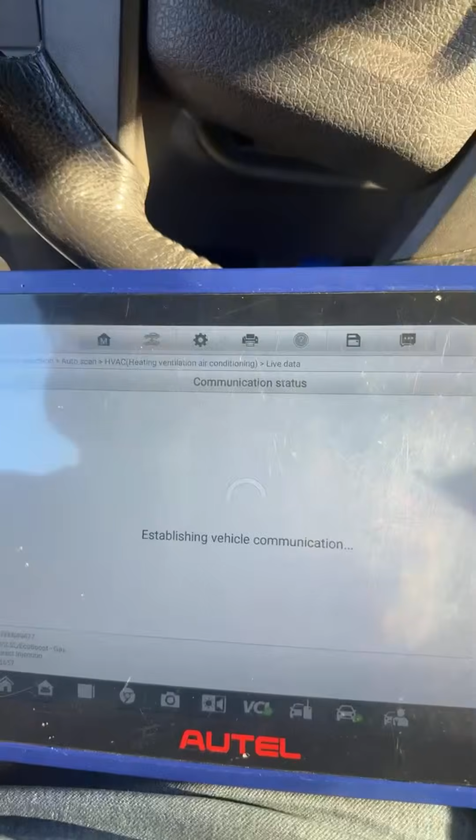And we can go in here and check this right here. Actually, we can go into the actual AC system here. Now that I know everything else is fixed, we have no other codes. Go read the live data on this car. Yeah, we're pretty cool. Actually, pretty cool. So fresh air, disengaged. The clutch right now is disengaged because I'm giving it gas. So engaged. See the clutch right there? Engaged, disengaged.

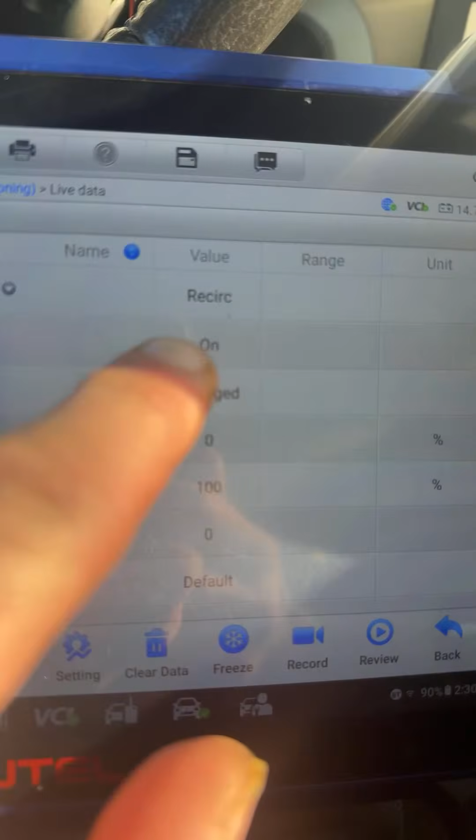Right here, servo is fresh air. That's what's going on. So this is bumping down to unknown. Recirculate. It should not be doing that. Yeah, so you definitely got a problem with your door, brother. You want to come here so I can show you something? So this has failed, you can tell. Actually, I think I have a customer with your same situation. See how it was going to the value unknown? See that right there? Shouldn't do that. Watch.

Watch it. I'm not doing anything. Watch it with this fresh air. It's just kind of going in between the values. It shouldn't do that. It should stay in one or the other, right? Like when I hit this, real quick, I hit that. It should go. Engaged. See your clutch? That's going in and out. Like I said, it could be your compressor starting to fail, but I don't think so. But you see, this right here is the problem.

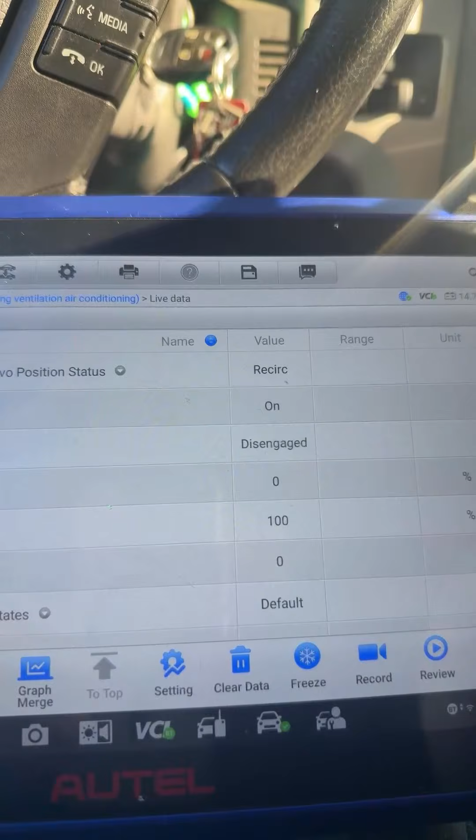Fresh air? Yeah, how it goes to fresh air. Right now, see, it was going back to this. I haven't touched anything, right? So don't hit this. It should stay on recirculation, you know what I'm saying? And then it'll say unknown. That's how I know this is kind of getting hung. Unknown, see? It doesn't realize where the position's at. So that's all it is.

You can almost tell, when it says recirculate, feel how cool it gets now with the recirculation on. Yeah, it'll get cooler. Super cool. And watch, right now it may get warmer, right? You see that? It kind of gets warmer, then it goes to unknown. Right now it's kind of not as cold. Now watch, it'll get cool. It's a little cooler. It's hard to tell, I know, you can barely feel the difference.

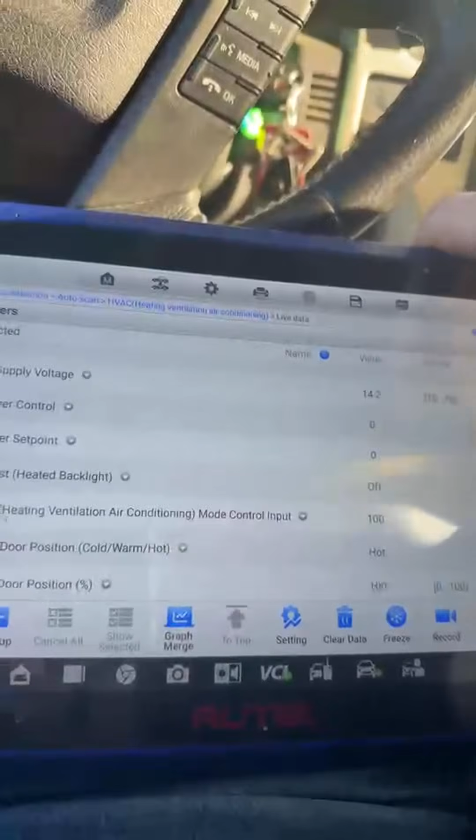So it's happening so quickly, it's not a major issue yet. Right. So other than that, everything else is good. So what's the main thing I need to get then? That sensor? Right now, you may be fine. I would keep an eye on it. It goes back to the expansion valve, which works like this.

The expansion valve, if you've ever seen it, is a thermal expansion valve. Basically, it opens and closes to send the refrigerant and make it evaporate. It goes from the thermal expansion valve into your evaporator core, and through there it does its thing, then it shoots it back out and basically turns hot to cold. I don't even know how to explain it. The whole system, there's a receiver and dryer. All this is one gigantic system, and it's very thorough.

Crazy. It just gets worse. Yeah, trust me. But what's crazy about your car is you had the problem where the fans were on for some weird reason. I've never seen that. That's what I was trying to figure out. But everything right now, like I said, your right blend door position is 100%. So the blend door is working fine.

So the only problem, yeah, I don't think it is though. This eventually will become a problem with the servo status. Next time I take it to the shop, I don't think it'll be a big deal. I mean, if it is, you need to get the thermal expansion valve done probably. That may be related to this. I don't know. But if this thing kicks on the fans again like that, this is unrelated, I'm pretty sure. This has nothing to do with what's happening underneath the hood with the fans.

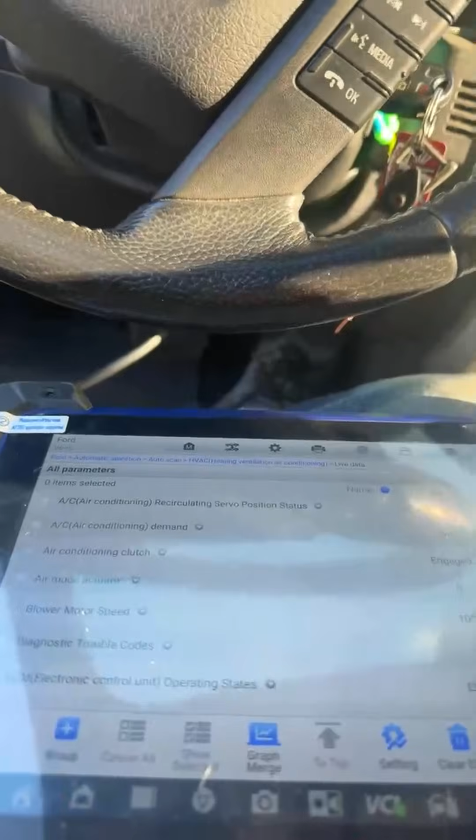All that does is you get so much pressure built up on the high side, it's noticing something's off in the system. So, like I said, the thermal expansion valve can't open and allow everything to go through the system like it should and enter your evaporator core, which is way up on your dash. So it's not allowing. And if it gets stuck on one side, that's why you built up all that pressure on the high side. When I took the cap off, it shot out of there because there was so much pressure, it was forcing it out even through the cap. I've never seen that happen before.

So yeah, either way, let me go back here and see. I'm gonna check it. What I'm gonna do is turn off your AC for a second. Turn it off all the way. You gotta push the button to turn this off, right here. All right, everything's off all the way. And now I'm gonna go back here and do one last scan. I'm gonna do one quick auto scan, make sure we look good. The only code that should come back is the one code. Where did it go?

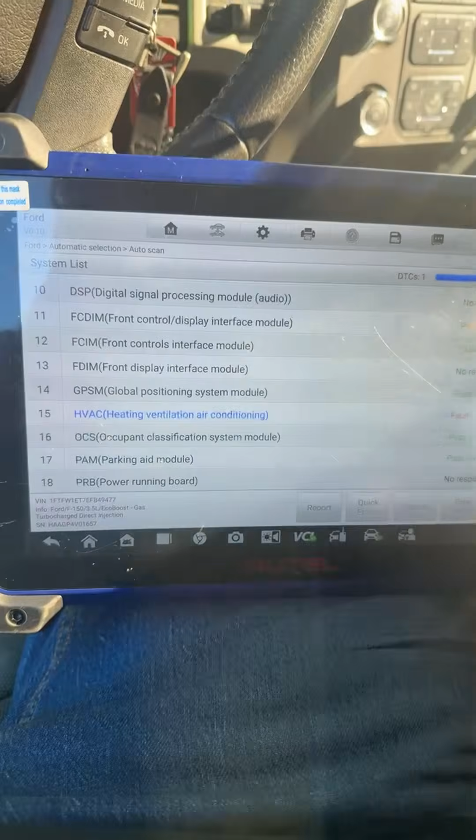Yeah, AC systems are so big and massive. It's so hard to explain. It's hard for me to even break it down without showing you a diagram. It's almost impossible. But just know that basically this is unrelated right here, I believe. Unrelated. New one, quick erase. It just doesn't allow it. It gets clogged up, so it doesn't open up to move through the system. So if it gets clogged up, it's gonna think something's wrong with the system, and of course it's gonna throw a code, and that's what it's doing here. It throws a code and makes the fans run for some weird reason on this car. I've never seen that before.

Anyway, I wiped them all. May not come back. Are the fans on now? They may still run. No, they're not. They went off. Yeah, because your engine's warm now, so it's supposed to run here or there, right? That's not a problem. Get out of here, shut it off. Okay, so that basically should be good to go. I just wanted to check it one time real good. Yeah, I got you. Give me 2 seconds, man.

So basically, if you have this issue, the reason I discharged his and charged it, put a little oil, is because the oil will help too. That oil won't go through the expansion valve because there's not enough oil in the system. I didn't put a lot, just a little bit. Somebody could have worked on the car before. Like I said, it could be an underlying issue. He can monitor it for a few weeks. Let me know if the fans start running again. Really, all you probably have to do is come over here if it does it again.

Open this up and then take a little flathead. Be sure that's not leaking at all. It's not, but just give it a little press. Be careful, it's going to shoot out quick. It's high side pressure, so it's supposed to be high pressure. Just give it a little, and that should stop the fans if he needs to. But overall, I think he's good.

And this is for any of the trucks, like the Ford F-150 XLTs. It's a 3.5 liter. It probably does it on the 2.7, I don't know. But this engine right here, there's nothing wrong with the vehicle at all. But if you have this issue, just remember you need to take care of that. The thermal expansion valve, more than likely, is your problem.